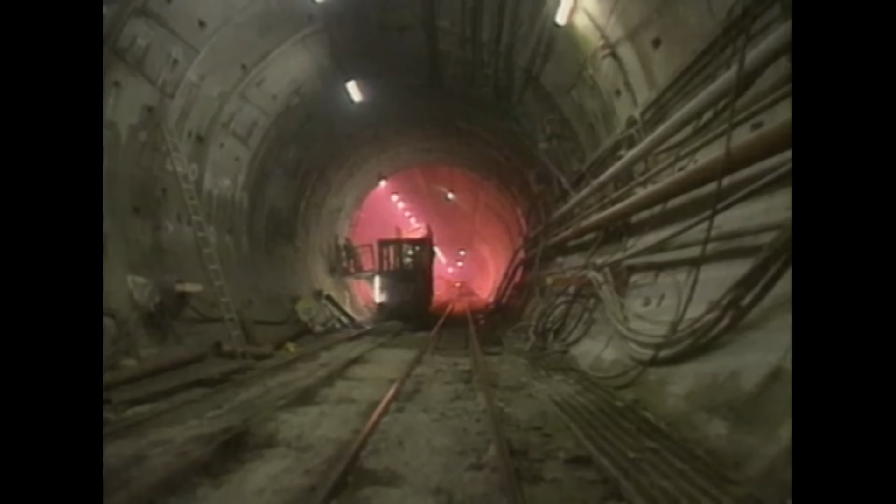Deep beneath the English Channel, one of the most ambitious engineering projects ever attempted is about to begin. Using Earth-eating robotic monsters, 13,000 workers are about to embark upon an epic quest to build the longest undersea railway tunnel in the world. This historic journey will push the limits of technology and human determination to the breaking point. Some workers will not survive. But the creation of the Eurotunnel is a story of triumph, one of this century's greatest superstructures.

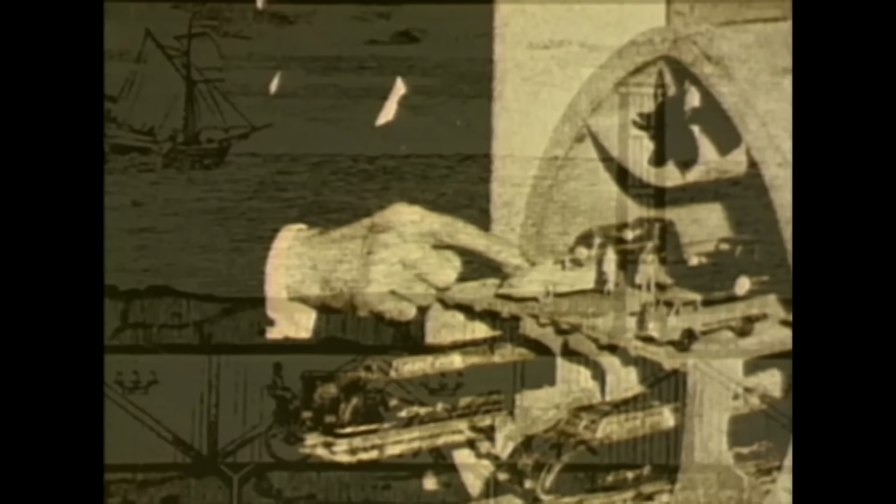Ever since the Ice Age ripped them apart 10,000 years ago, a small finger of ocean, the English Channel, has been the only path between England and Europe. Throughout history, countless lives have been lost trying to cross this treacherous body of water. For centuries, amateur designers and skilled engineers alike have tried and failed to create a safe, permanent link. The first channel tunnel design, if you can call it a design, was in 1802. But at that time, the technology was so limited that really it was science fiction.

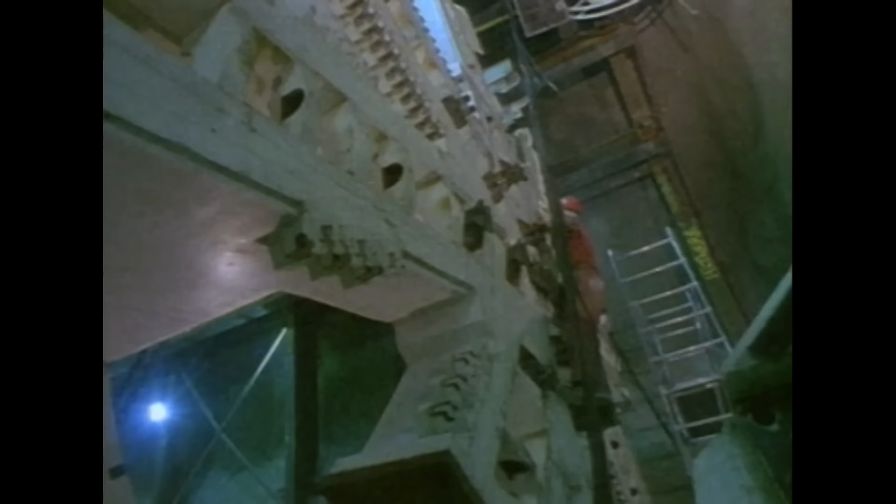But by the end of the 20th century, the line separating technology and science fiction is rapidly disappearing. It is now possible to create machines the size of large buildings, machines that can literally move mountains. Inside factories like these, engineers begin experimenting with space-age technologies to take humans into new and potentially dangerous territories. Soon, an age-old question is asked once more. Can a tunnel be created under the English Channel?

But does England herself even want such a passageway? From the days of Camelot to the age of Churchill, the Channel's cold, choppy waters formed an imposing barrier between the monarchy and its enemies. Would-be conquerors from Napoleon to Hitler developed plans of how they could first defeat the English Channel and then England itself. Ironically, during World War II, Adolf Hitler developed a plan to dig a tunnel near the captured French town of Calais, site of the modern-day French Eurotunnel station.

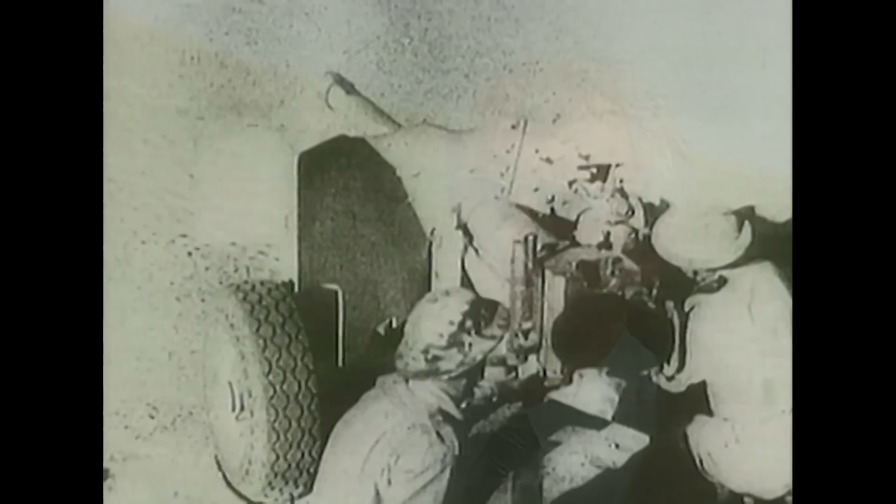It was a threat the Allied forces took seriously. Bomber pilots were requested to report any plumes of grey material in the channel, and they actually established soldiers along the coast here with listening devices trying to detect any sounds of tunnelling. But with the defeat of Germany in World War II, Europe entered a new era. The sounds of war were replaced by the sounds of commerce.

By 1986, one-time rivals England and France decide the Channel has become an economic barrier, an obstacle that must be eliminated. To achieve this, the French and British governments dedicate themselves to the task of building a modern marvel, the world's most technologically advanced undersea tunnel. Engineers and business people alike dream of high-speed rail trains traveling beneath the English Channel, carrying the citizens of a united Europe into newfound economic opportunity.

But before the first shovel of dirt is even dug, the project seems destined for failure. This was a nightmare at the time. We had to decide on things which we didn't really know about. And one example, which I always quote, is, what diameter do you want for the tunnel? Now, you would think that this was something that had been decided before, but it hadn't. And the contractors kept pestering us, saying, what size tunnel do you want? And we said, well, listen, we just arrived. I don't know.

For as long as we can all remember, people have dreamed of a channel tunnel. As this ad, seeking Eurotunnel investors, points out, the project was financed solely by private investment, with an original price tag of over $10 billion. This made it very different from other large engineering projects of this century, like New York City's Lincoln Tunnel, which was government-funded. Ultimately, Eurotunnel had to answer to its shareholders.

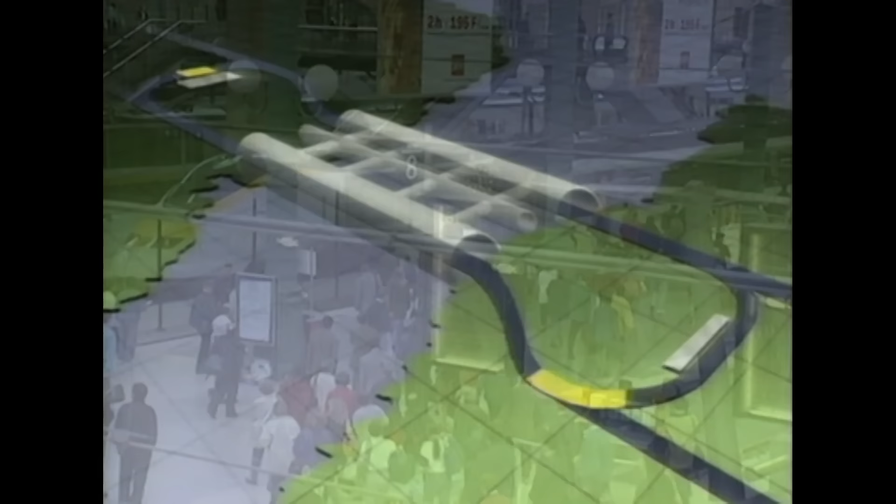Engineers envision a system that will carry thousands of passengers and hundreds of tons of freight each day on this circular 30-minute trip. Of the 35 miles between the French terminal at Calais and the British terminal at Folkestone, 24 will be undersea. No other project has ever attempted to tunnel this far in such a hostile environment. There are lots of problems, technical problems. How will a car move inside the tunnel? What kind of trucks can I transport? You know, all the variety of things.

As the project begins in late 1986, all of these questions remain. But before issues regarding the tunnel's operation can be addressed, the most daunting and obvious problem must first be solved. A machine that can chew through more than 30 miles of solid rock, hundreds of feet below the sea, doesn't exist. It will have to be created.

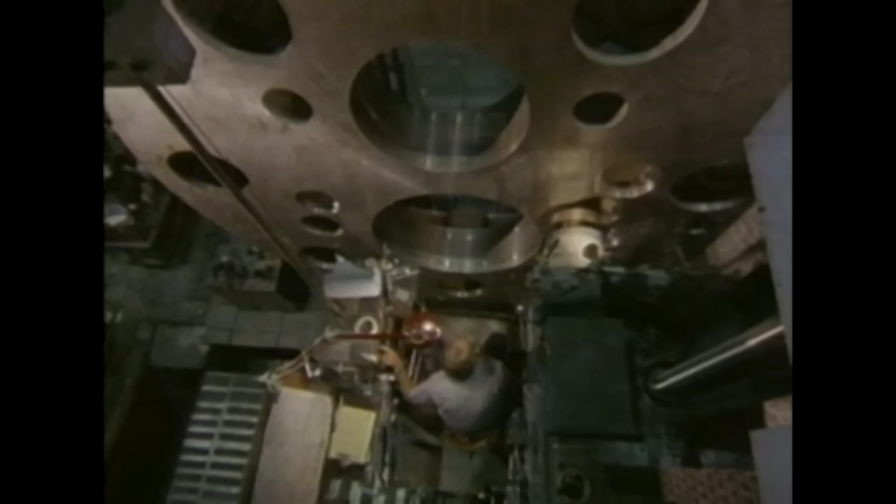Thousands of miles from the English Channel, on the outskirts of Seattle, Washington, a solution is being forged of iron and steel. Here at the Robbins Company, a firm specializing in heavy mining and tunneling equipment, the next breed of super machines is being created. In this colossal factory is a mechanical beast that dwarfs its creators. It's called a tunnel boring machine, or TBM.

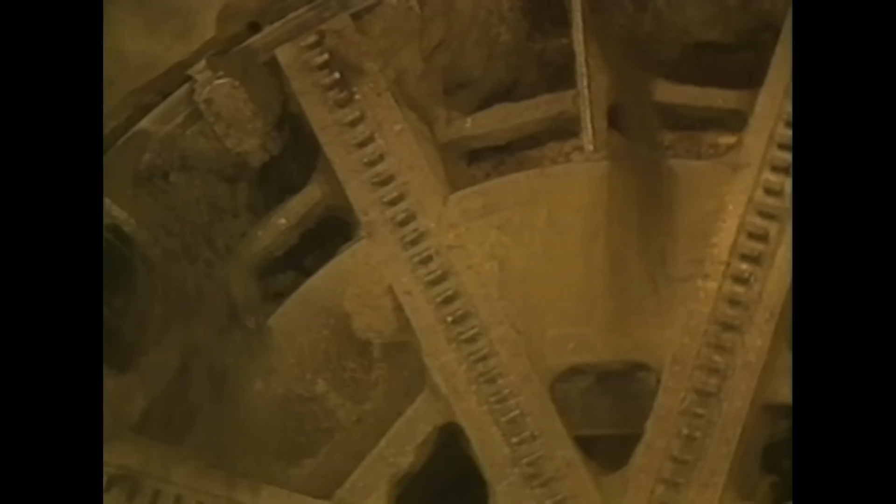When finished, this giant snake-like earth mover will be over 800 feet long and weigh over 1,500 tons. Its rotating head, almost 30 feet in diameter, consists of hundreds of cutting edges made from tungsten carbide, one of the hardest materials known to man. These will be the teeth of this mechanical monster, the cutting force it will use to chew through the earth below the channel.

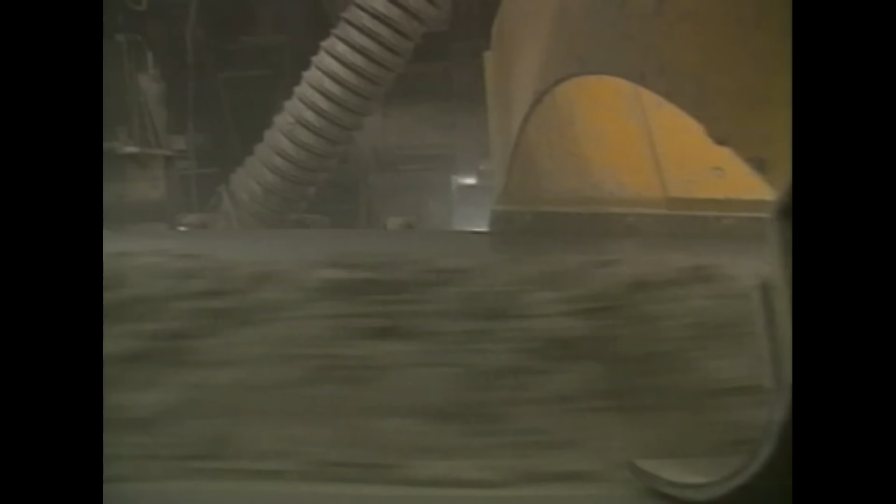Pushing the machine forward is a series of powerful hydraulic devices called rams, which will drive the cutting head through the rock. The millions of tons of excess rock it will dig up, called spoil, will be carried out on conveyor belts through the TBM service train attached to the cutting head. The challenge of carving tunnels through solid rock has always pushed the boundaries of our engineering and manufacturing skill. Even today, it requires a rare balance of brain and brawn.

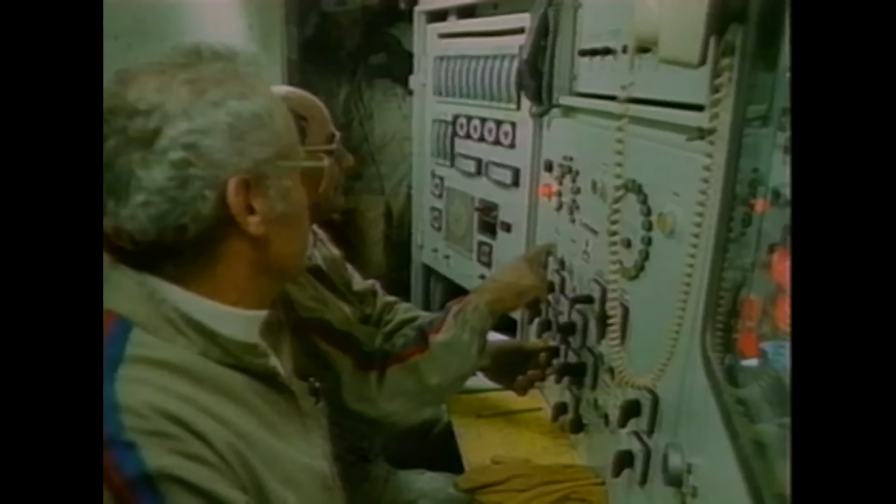When large-scale projects like the Los Angeles Aqueduct System were being created in the 1930s, tunneling technology was in its infancy. Today, the Robbins Company will replace blasts of dynamite with a computerized mechanical marvel of which the early pioneers could only dream. But the danger these modern miners face will also be unparalleled.

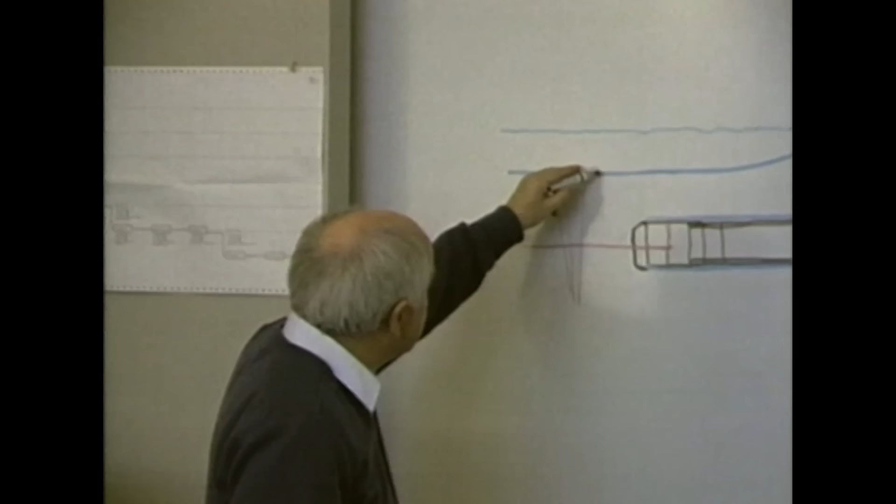At its deepest point, the tunnel will be 246 feet below the seabed. During construction, if their boring efforts create a crack in the tunnel or cause a leak, the force of the incoming water will be equivalent to over 7,000 tons of falling weight. Man and machine would be crushed in an instant. At the Robbins Company, frightening scenarios like these must be addressed.

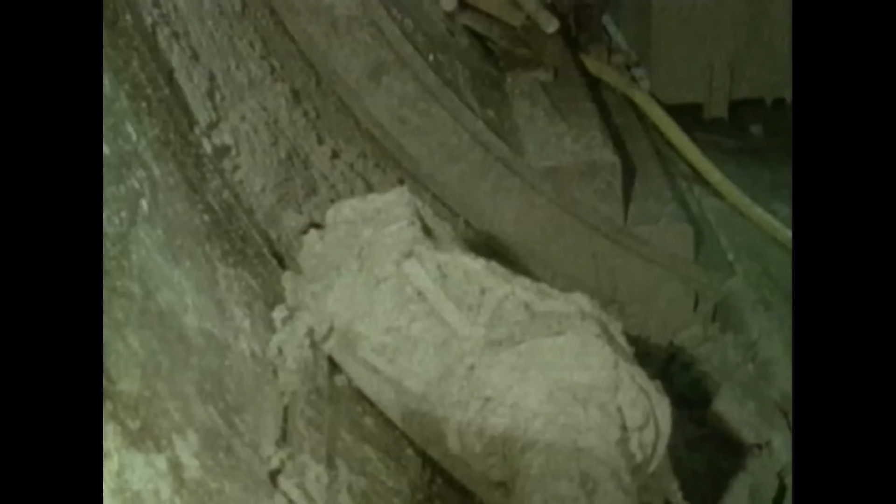Project organizers selected the tunnel's route precisely because it goes through a layer of chalk called marl, which is well suited to their tunneling efforts. It is also the last remnants of the original land bridge that once connected England and France over 10,000 years ago. While this chalk is ideal for tunneling on the British side, the situation on the French side of the channel is far more treacherous. Here, the seabed is riddled with faults and fissures. Conditions that could lead to the deadly accidents engineers must try to prevent.

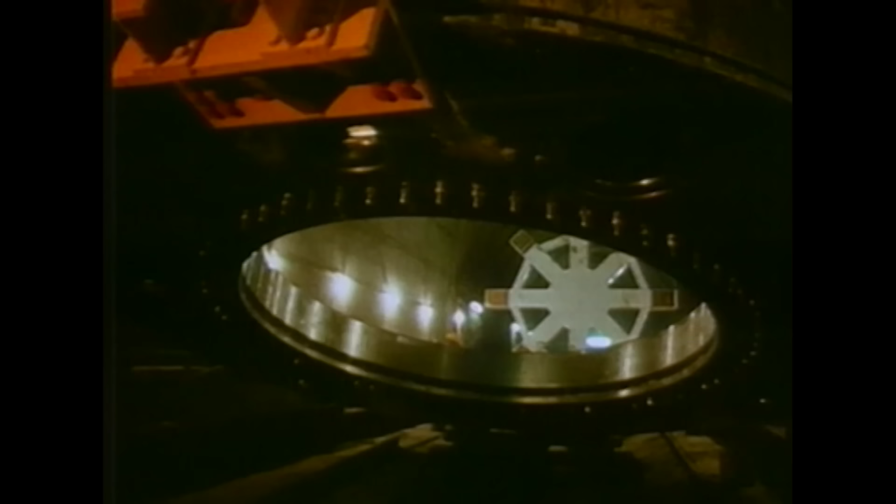Of the 11 TBMs that will be created for this mission, the machine that will be used on the French side faces the most difficult job. Working at greater depths, in parts of the seabed that are far less stable than the British side, this undersea giant will have to withstand pressures twice as intense as any tunneling machine has ever experienced. So engineers decide to create a special TBM that is part boring machine, part submarine. When finished, it will be able to withstand the same amount of undersea pressure as a World War II sub.

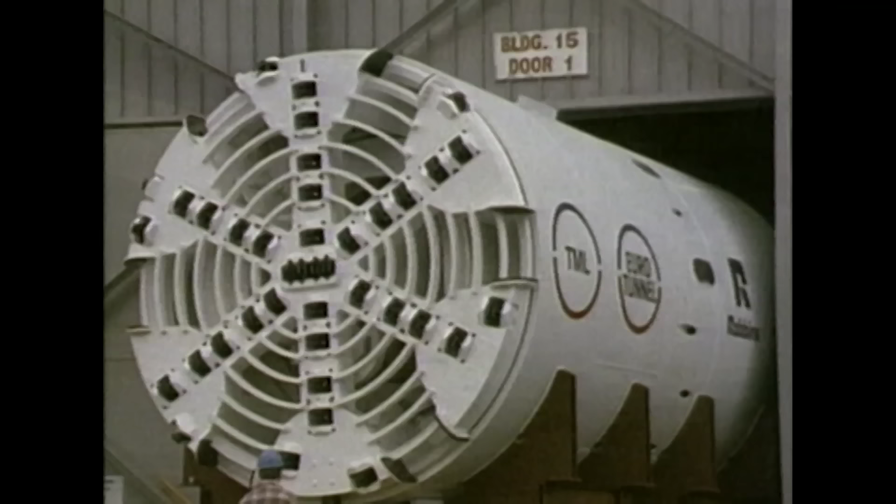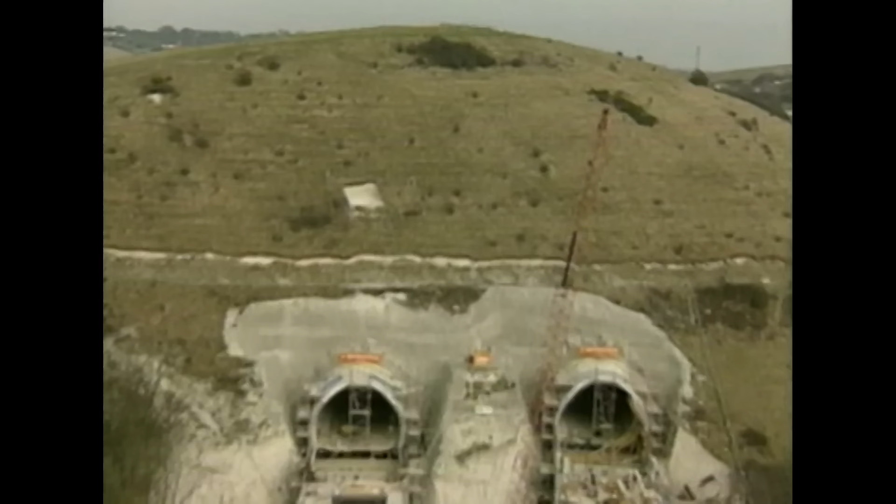Finally, the technology behind the dream of reuniting the European continent seems to be in place. And while the project will ultimately link England and France, the massive construction process will be an international effort. Companies from Germany to Japan will add their technologies to the mix, making the Eurotunnel a truly global undertaking. While this international force rallies to overcome the physical obstacles of the channel, there are other challenges already mounting. Namely, the race to complete the tunnel on time and on budget.

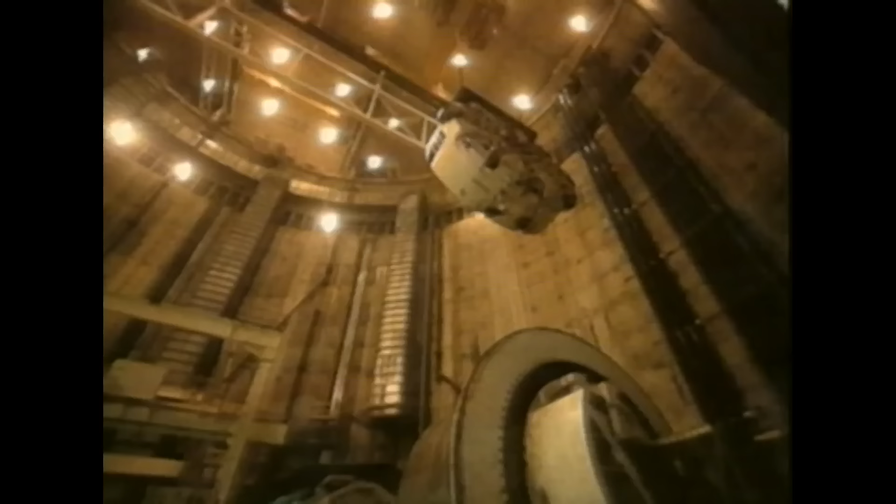It is now December 1987. This is where the Eurotunnel begins: 2 huge shafts at Sangatte, France, and Shakespeare Cliff in England. Too enormous to be delivered to the site as complete machines, the first TBMs are lowered piece by piece into the darkness of the shafts 200 feet below. Going with them are the workers, the men behind the machines. They too are descending into the unknown, taking the first steps of an epic journey.

As the first work begins and the light of day slowly disappears, there is an air of hope, expectation, and much uncertainty. While extraordinary safety measures have been taken to protect the workers, it remains a dangerous world. And for some, the greatest civil engineering project of the 20th century will carry the ultimate price tag.

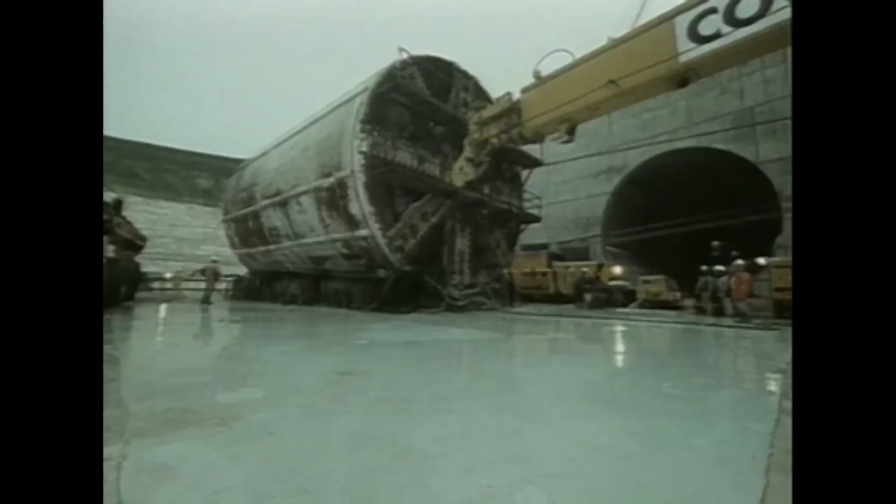As giant mechanical earth eaters are given a final check before being lowered to their work site hundreds of feet below the ground, one of this century's most ambitious engineering projects is underway. The creation of an undersea railway that will link England and France begins here in Sangatte, France, and here at Britain's Shakespeare Cliff, near the site of the future Folkestone Terminal.

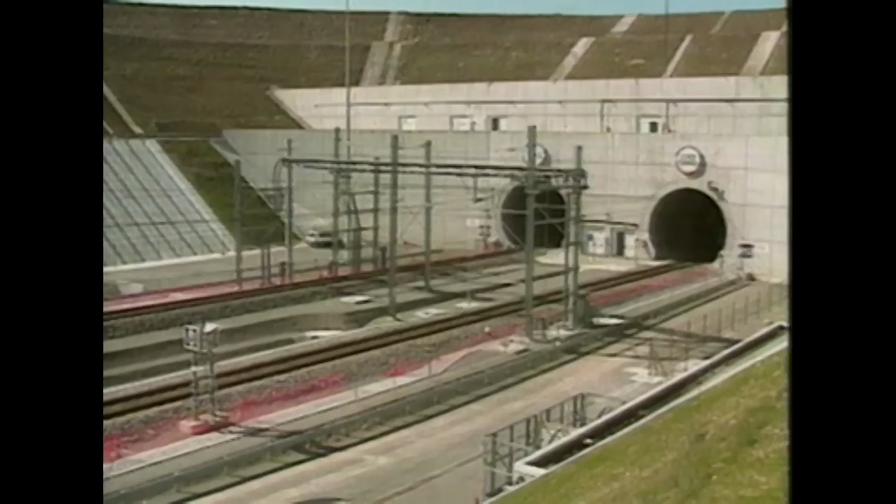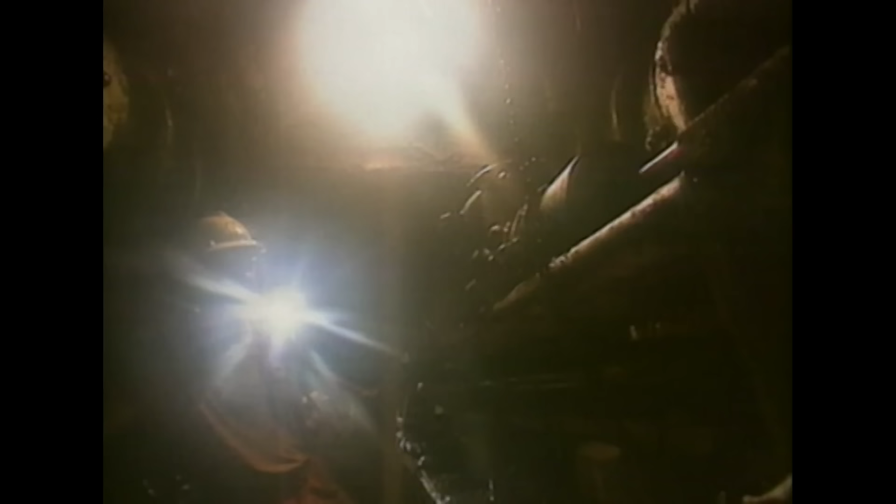What officials hope will someday be the world's premier railway system is now just a hole beneath the earth. The race is on. Compounding the awesome challenge of the actual tunneling operation is a human challenge. British and French workers, once bitter rivals, must now learn to work together. Once they reach the dark and dangerous caverns deep below the earth, there can be no room for cultural misunderstandings.

A French engineer is trained to make a plan. They can't start work unless they can see what there is to be done, see where their task fits into the whole thing, and see how it's all going to be organized as it goes along. No such thing in the British culture. British culture is to sit down and say, now what have we got to do, chaps? And sort out who's going to do what and set to work.

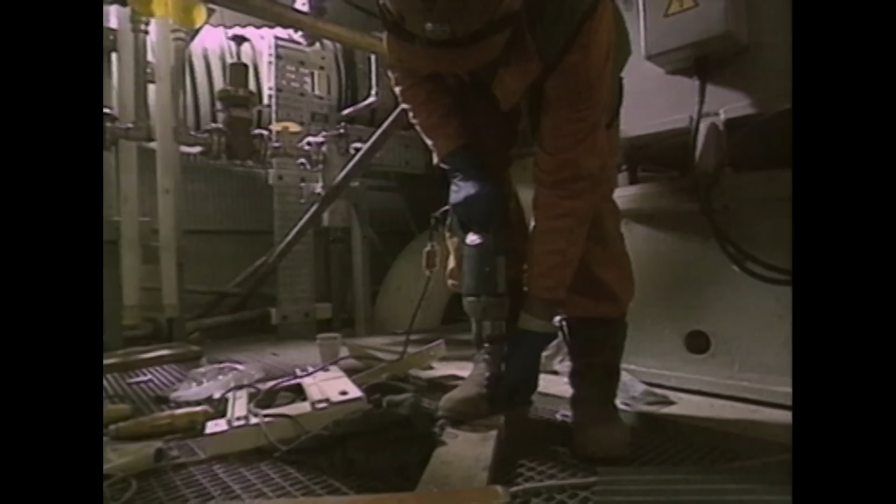One of the first problems they face is the assembly of the giant tunnel boring machines, which the workers christen the moles. Even the smallest machine takes months to build and costs several millions of dollars. The largest of these subterranean titans weighs 1,500 tons. Because of their enormous size and weight, the TBMs must be assembled on site, which in this case is far below the earth.

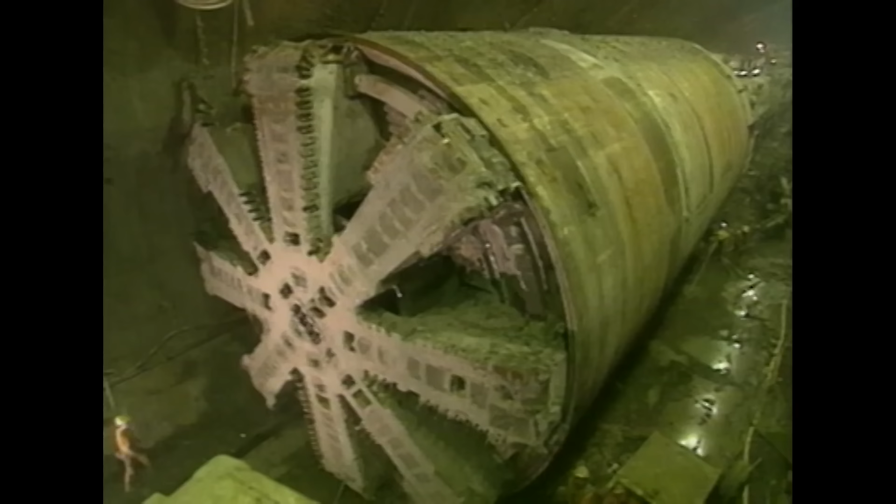The actual cutting head of the TBM is just the tip of its immense body. Attached to it is the service train, a multi-car train system that carries the hydraulic power to drive the TBMs forward. When connected to the cutting head, each service train is a staggering 850 feet long. One of the service train's main functions is to be a conduit for the removal of millions of tons of rock and sediment these mechanical moles will dig up.

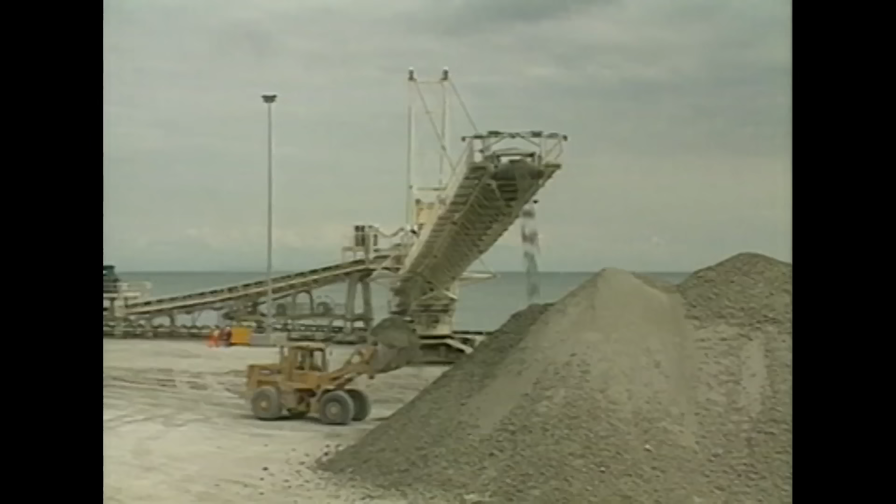The debris will be carried by conveyor belt through the service train to a supply train and back, and finally to disposal facilities in England and France. The removal of the spoil is a major challenge. When operating at full speed, engineers estimate the TBMs will cut through 750 feet of rock per day, removing 2,400 tons of waste per hour. When the project is finished, the total amount of rock removed would fill a major football stadium 13 times.

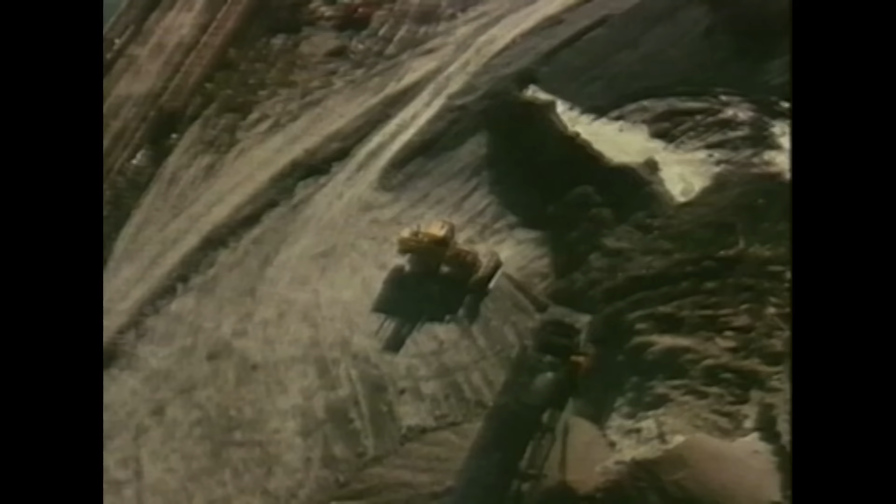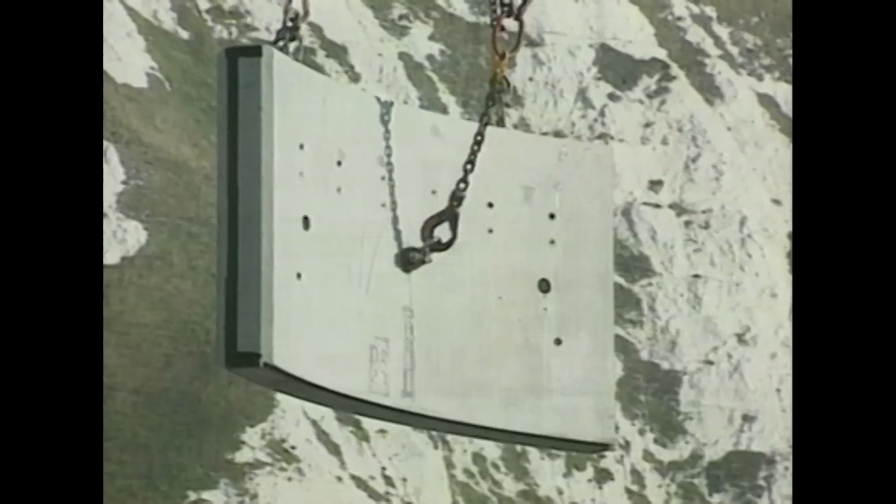But equally important as taking material out of the tunnel is the challenge of getting materials in. And one of the most crucial building blocks at this underground work site are the 500,000 concrete slabs which will line the tunnel walls. Because these concrete rings will provide a life-saving barrier between passengers and the churning English Channel above them, their construction is of utmost importance. Special factories are built in England and France to manufacture these vital sections.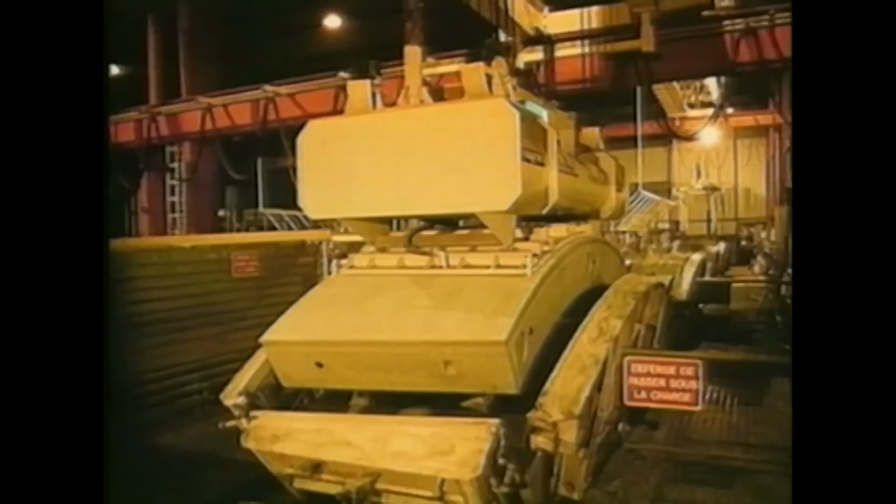Each ring is made of specially reinforced concrete, even stronger than the concrete used in nuclear power plants. It is also reinforced with a framework of steel rods for extra resistance. This is necessary because the savage ocean pressure that will bear down on the tunnel walls is equivalent to 12 atmospheres, or 12 times the pressure we feel on the surface. No human could survive under such immense force.

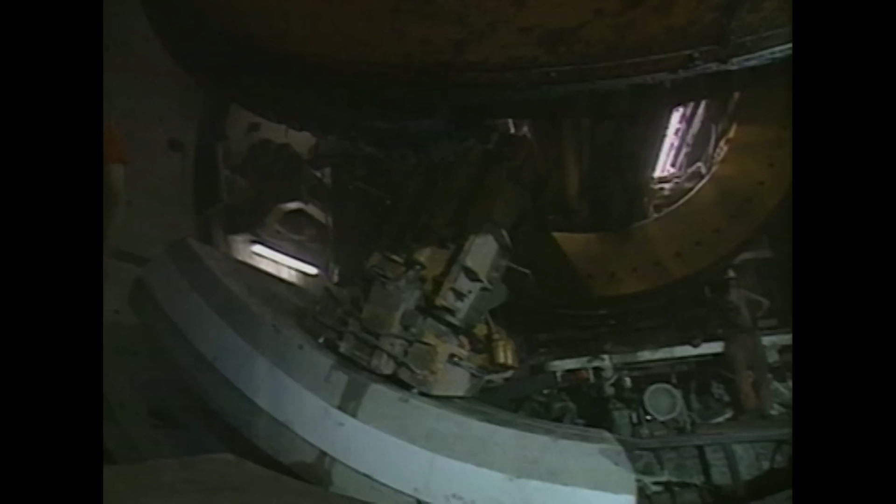Once the rings are finished, they are transported by narrow gauge railway to the TBMs in the tunnel and brought up through the service train. Then, a remarkable display of mechanical symphony takes place. As the spinning head of the machine claws its way through the rock, operators using giant cranes create the tunnel walls right behind them. After being fitted into place with incredible precision, a gap of only 3/4 of an inch remains between each section. This tiny space is then sealed with a cement grout, and another piece of the tunnel wall is complete. When finished, each ring of the tunnel will weigh 40 tons.

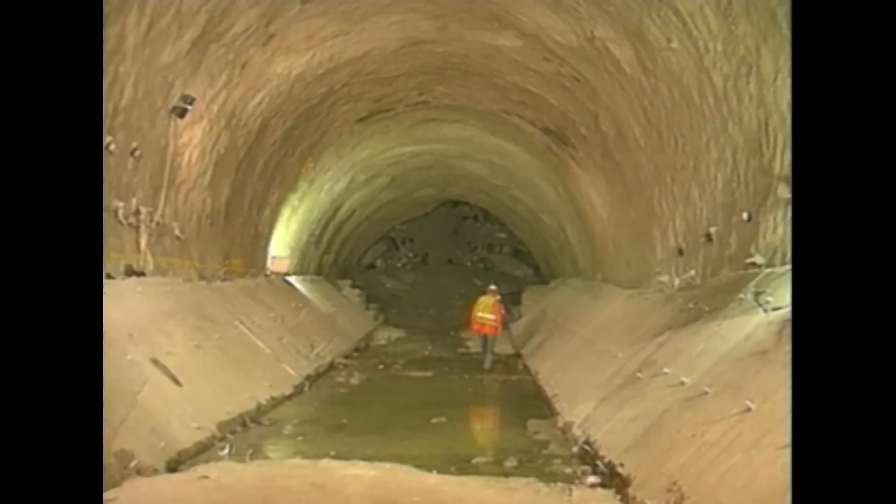But just as the skeleton of the tunnel is beginning to take shape, the project suddenly seems in danger of falling apart. It is now 1988. The British and French teams are starting with the middle service tunnel, drilling towards each other to meet in the middle of the channel. But by May, the giant tunneling machines begin to break down.

It was designed to operate at pressures that no machine had ever operated before. It was strictly a prototype as a result of the fact that it was so complex and nothing like it had ever been built. It had all kinds of troubles. Practically everything important on the machine failed or broke at one time or another shortly after we installed the machine.

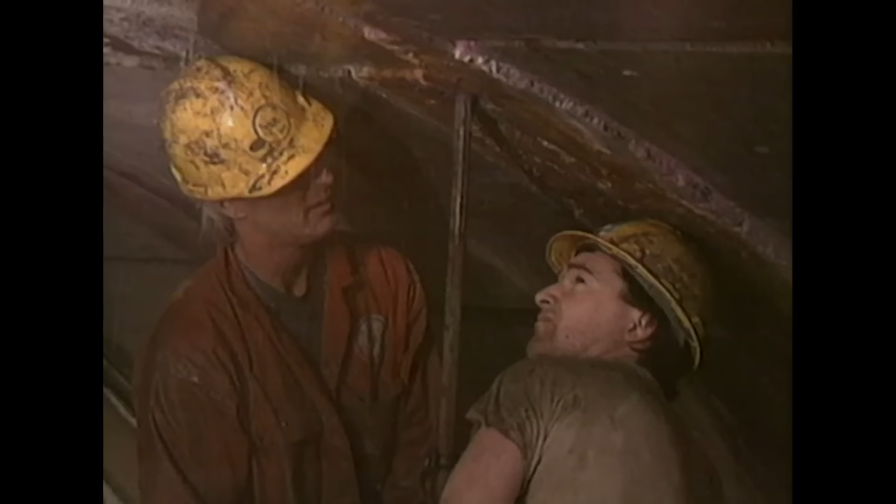On the French side, the TBMs are encountering precisely the scenario engineers feared the most: hidden faults and fissures in the seabed. On the other side of these cracks lie the awesome forces of the English Channel. It was technically very difficult because of the water pressure that we had to work in. As the machine bored forward, it bored right through faults that were filled with seawater, connected directly to the ocean.

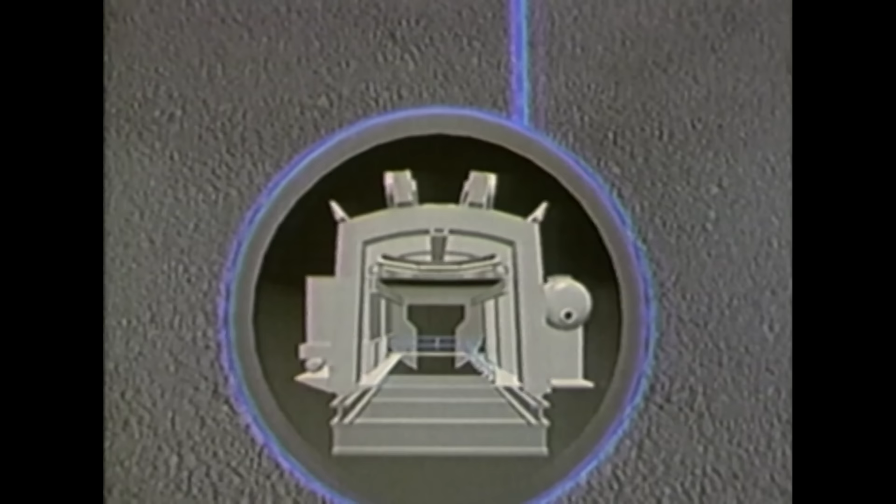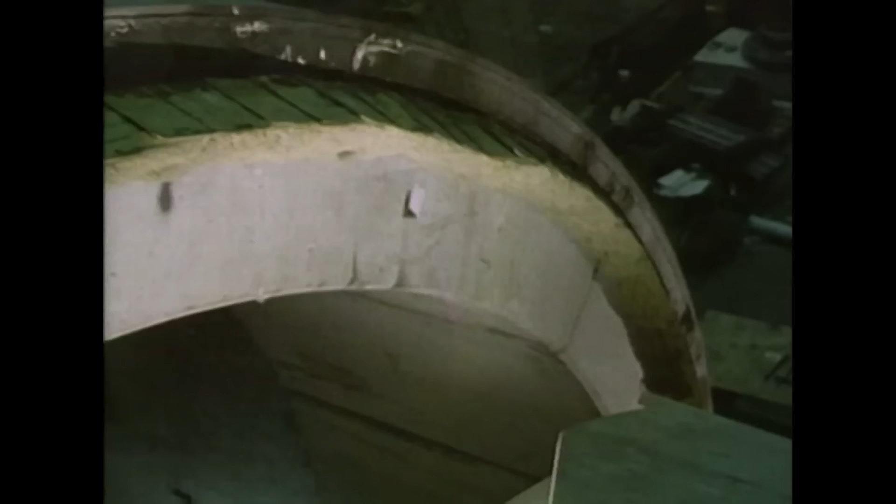Waterproofing measures designed to protect the TBM's delicate electronic equipment from the seawater fail, stopping the giant machine in its tracks. Then, as engineers scramble to repair the electrical problem, another even larger problem develops. This is the seal we intend to use. It's a wire brush type seal. The ring of watertight seals providing a life-saving barrier between the TBM and the tunnel walls also begin to fail. Again, victims of saltwater corrosion.

Engineers need a solution, and fast. The corroded brush-like lining seals are replaced. Then, a mixture of paper and special grease is applied to the brushes. When this coating comes in contact with seawater, the paper particles expand and create a permanent, watertight bond between the segments. The TBM is once again waterproof.

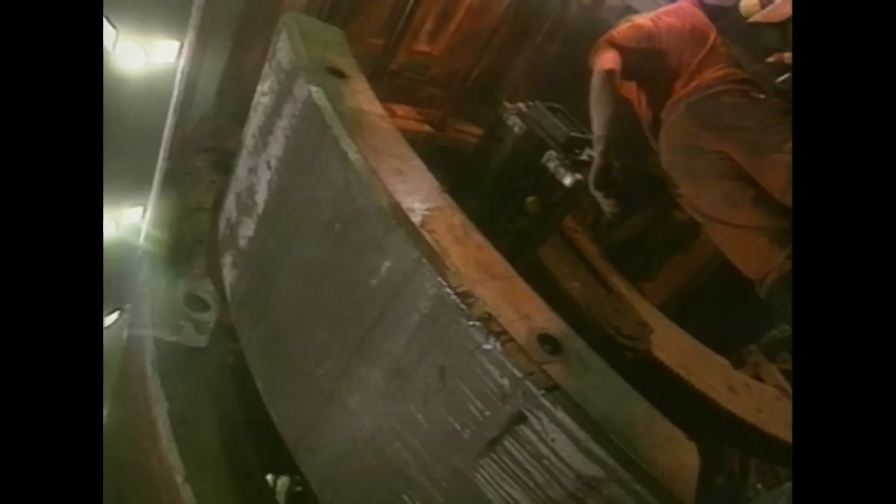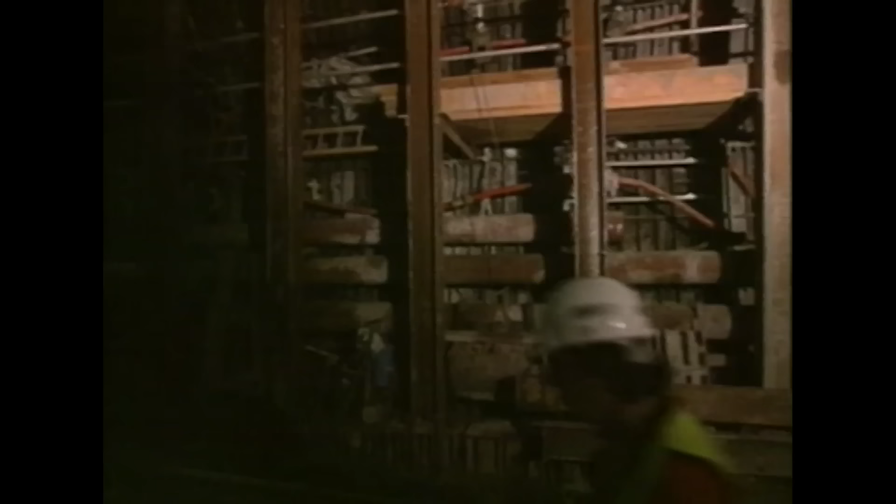But to Robbins Company President Richard Robbins, the tunnel wall seemed far more secure than the legal agreement he is working under. Soon he is forced into a desperate personal gamble. The French contractor knew that we had designed a prototype machine that we didn't really understand exactly what it was going to cost us to build. So he built into the job some interesting incentives that if we met certain project construction points along the tunnel by certain dates, we would earn bonuses.

But it was so bad in the early stages that I was really almost betting the entire company that we would succeed. So it was a big risk for a small company like ours. But it isn't just contractors like the Robbins Company who are gambling their future. Because the entire project is privately funded, Eurotunnel officials must hit their own deadlines to continue to receive funding. With each new delay, the entire fate of the Eurotunnel lies in the balance.

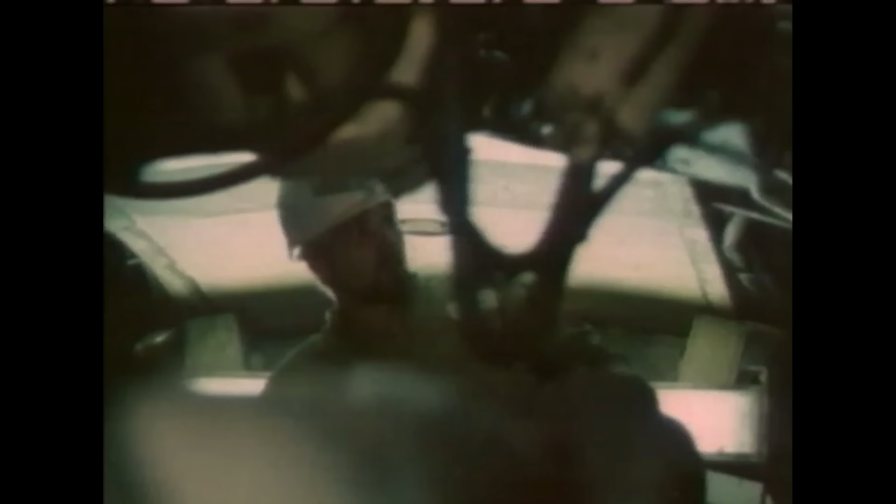The one thing we all understood was that if we stopped, it would be very hard to restart. The relationship with the banks, the problems with the contractors, the difficulties with the governments, or just plain organizational difficulties of whatever kind, would very probably bring an end to the project. Finally, engineers are able to redesign the mechanical flaws in the French TBM and move ahead. But they are now 9 months behind schedule. To make up the time, both the British team and the French team must stay on course.

But how will these mole-like machines, tunneling towards each other from opposite directions, maintain such a specific course? They are far too deep below the Earth for high-tech satellite mapping to be of any use. And even the slightest deviation in their course, a fraction of 1 degree, will mean they fail to meet up under the channel. To remain on track, tunnel engineers use a space-age laser beam guidance system.

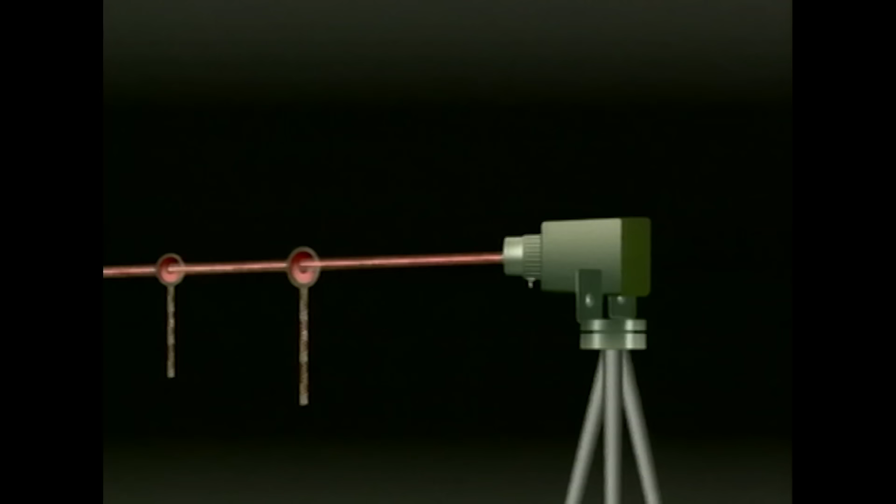Here, a red laser emits a beam from behind the cutting head. As it sends a beam of light forward, it hits various control points fixed to the tunnel wall before striking a special target on the rear of the cutting head. These control points feed information provided from the laser straight into the machine's onboard computer. From the TBM control cabin, operators can now adjust the hydraulic rams that thrust the TBM forward and keep it precisely on the right course.

But even if the two machines do stay on course, the complex plan for after they meet has never been tried before. As the French and British TBMs tunnel towards each other, they will reach a designated point where they will stop.

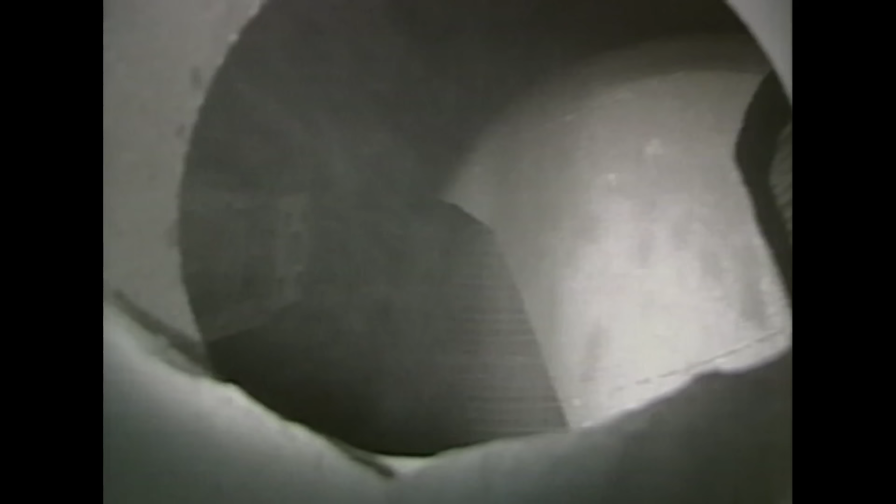They will now be a mere 100 yards apart. At that point, a long steel probe will be sent through to determine if they have been truly on course. If so, more conventional equipment will finish the relatively short distance that remains. But if the two machines are off course, it will mean yet another delay while engineers try and come up with a solution. And with the project's skyrocketing budget under fire, more delays could signal the end of the dream called Eurotunnel.

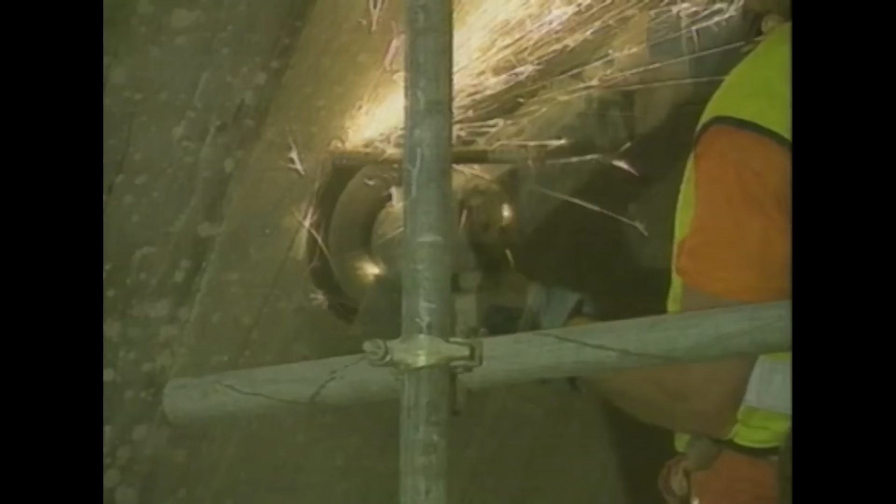1989. The year begins on a positive note at the Eurotunnel construction sites. The earlier problems with the French tunnel boring machines seem to be solved. One of the giant TBMs even sets a world tunneling record. For almost 3 years, work on the tunnel has progressed without a fatality. But in the first days of a new year, a time usually associated with hope and new beginnings, tragedy lies just around the corner.

On January 20th, in the dark recesses of this massive cavern, the tunnel claims its first victim. 19-year-old engineer's assistant Andrew McKenna is walking half a mile down the tunnel beside the narrow-gauge railway tracks used by the supply carts. Apparently failing to hear an oncoming train, he is suddenly crushed to death by a locomotive carrying spoil from the site.

Without warning, the stark reality of their dangerous jobs becomes clear to every worker. The tunnel has claimed one of their own. Even with 20th century technology, the job of building tunnels remains extremely hazardous. While workers cope with the loss, they also have to deal with other day-to-day fears brought on by the tunnel.

At the pumping stations, they actually went underneath the tunnels, and there would be like a little tunnel under the main tunnels, so the trains would be going above you, and you could be down working in 3 foot of water in a little cross passage with a blank wall with nowhere else to go, and that could be very claustrophobic. And we actually experienced people being sent in to work with us who were, and found out they're claustrophobic.

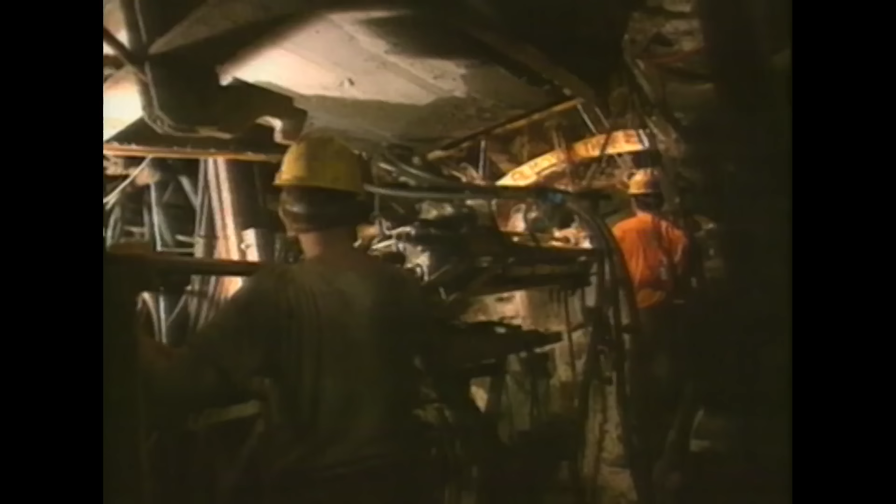And then it became a little bit scary because you had to say to them, look, you can't work with us down there, you're terrified of the situation, and you had to think of everybody else's safety. It was dark, it could be dusty, so you had to be able to cope and have a sort of positive outlook, really.

Even with the most rigid of safety standards, the death of Andrew McKenna will not be the last tunnel casualty. In all, 12 people will die in this historic and sometimes tragic undertaking. And while the mood of the workers has turned suddenly dark, the tunnel itself remains unchanged. Here, it is always dark. Workers who refer to their machines as moles are left wondering if they are the real underground creatures.

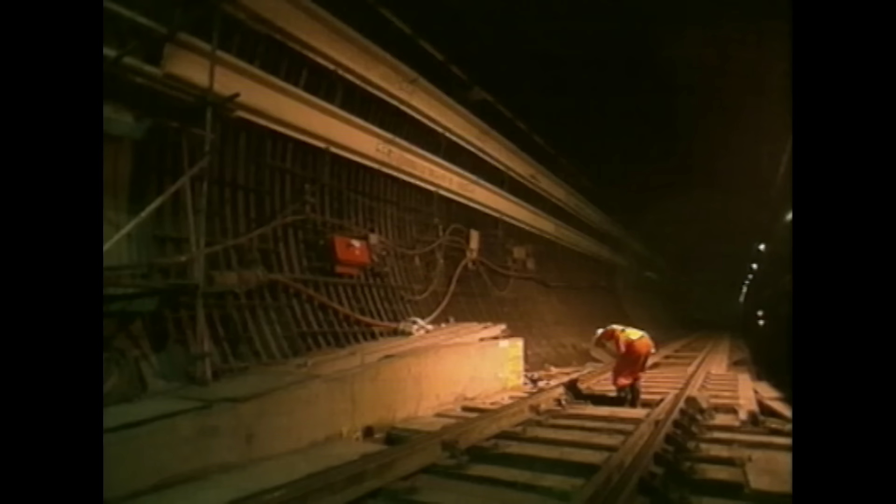You could be on a day shift where you arrived at work 5 o'clock in the morning and it was pitch black. You could go into a tunnel, work all day in darkness or semi-light, not bright, and then you come out at 5 o'clock at the end of your day and it was dark again. So you could go a whole week without seeing daylight. And that was a very weird experience because it's daytime and yet you never saw it.

As workers move forward in the darkness below ground, above them, work continues on the high-tech trains that will use the system when it's finished. The new service being created exclusively for the Eurotunnel is called Le Shuttle. Tunnel officials say the name is an example of the Anglo-French cooperation that characterizes the project. When finished, Le Shuttle trains will carry passengers in their cars on a continuous loop between the Folkestone terminal in England and the Calais terminal in France.

In plants like these, workers use more than 10,000 welds to mold more than 5,000 parts into the single shell of a train car. Each Le Shuttle train is being specially built for the frequent trips and heavy loads it will haul. To provide maximum power, a 132-ton locomotive is placed at each end of the train.

They have to be very special trains because the trains themselves are half a mile long and they have a lot of cars inside them or a lot of trucks, and therefore the locomotives have to be very powerful. They're the most powerful locomotives in the world.

Each of these locomotives must be capable of pulling a 2,400-ton train by itself. For this kind of power, they will draw upon 25,000-volt electrical cables. This high-voltage energy source provides the equivalent force of a 7,600 horsepower engine, about 100 times the power of an average car.

While the shuttle trains have the most powerful locomotives on Earth, the sleek Eurostar trains have the world's fastest. The Eurostar passenger line uses the popular TGV trains, which will travel from Paris to London at speeds of 185 miles per hour. While in the tunnel, the trains will travel at more subdued speeds, approaching 100 miles per hour.

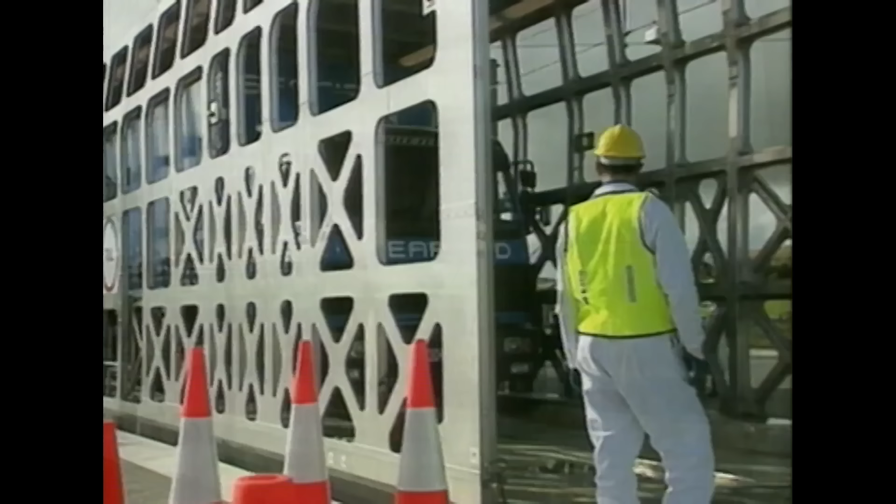Because the transporting of commercial freight will be so important to Eurotunnel's economic success, huge new rail cars are designed to transport heavy trucks. Each freight shuttle, also a service of Le Shuttle, will have 28 carrier wagons like these. Each carrier wagon can accommodate a truck weighing up to 44 tons. Below the earth, there is no finished railway for any train to travel upon. But that is about to change.

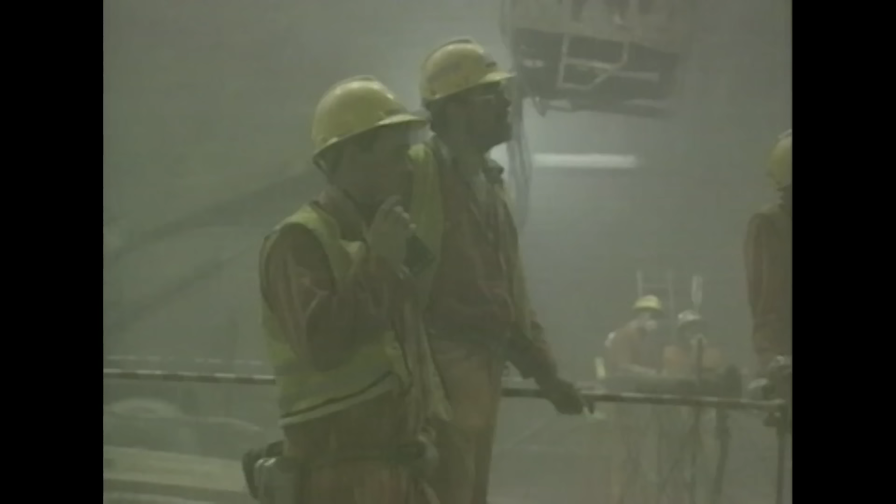It is now October 30th, 1990. There is a new feeling in the air today, a feeling of expectation. After 3 years of tunneling, the British and French TBMs digging the service tunnel, which will run between the two rail tunnels, have arrived at their undersea destination. Facing each other under the English Channel, 100 yards apart, the machines have stopped their digging. It is strangely quiet. The same question races through each worker's mind. Have they lined up?

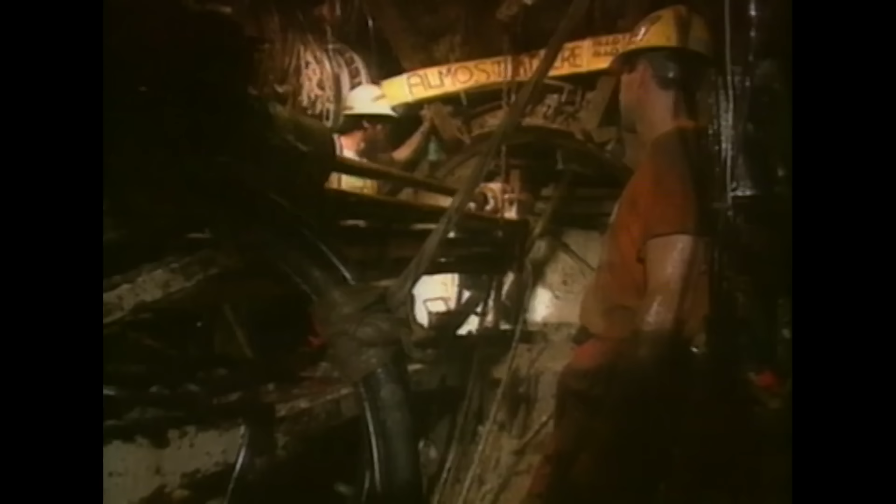A probe is sent through. There's a tense silence. Each worker at every level of the project knows it will be a catastrophe if the tunnels are off course. This would be the type of mistake that could fuel the flames of anti-tunnel sentiment into a raging fire. Finally, they get the news. The tunnels line up. England, by virtue of a 100-yard pole, is no longer an island.

After boring through 23 miles of solid rock, the tunnels are only off by 20 inches, well within the acceptable safety margin. It is a momentous achievement. While the project's workers, a unique collection of specialists from across the globe, revel in their victory, a celebration is quickly planned for the face-to-face breakthrough. Since there is still a 100-yard gap between England and France to close, it is decided that the official breakthrough of the service tunnel will take place on December 1st.

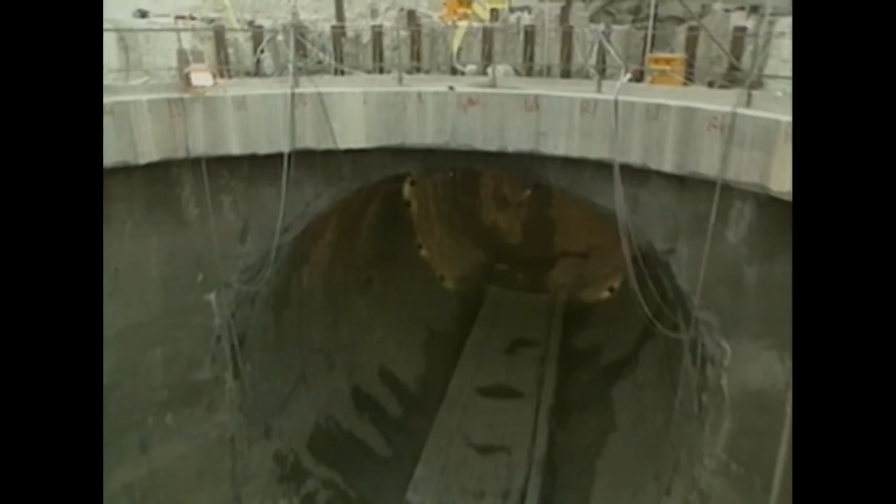As workers return to their jobs with a new sense of accomplishment, a lottery is held to pick one worker from each country to meet in the completed tunnel. Meanwhile, there is the problem of what to do about the last 100 yards. It is too expensive to retrieve both the French and the British machines, so a unique solution is developed. The British aim their machine downward and effectively commit mechanical suicide, burying the high-tech behemoth deep into the earth. This allows the French TBM to move forward and connect with the British side of the tunnel.

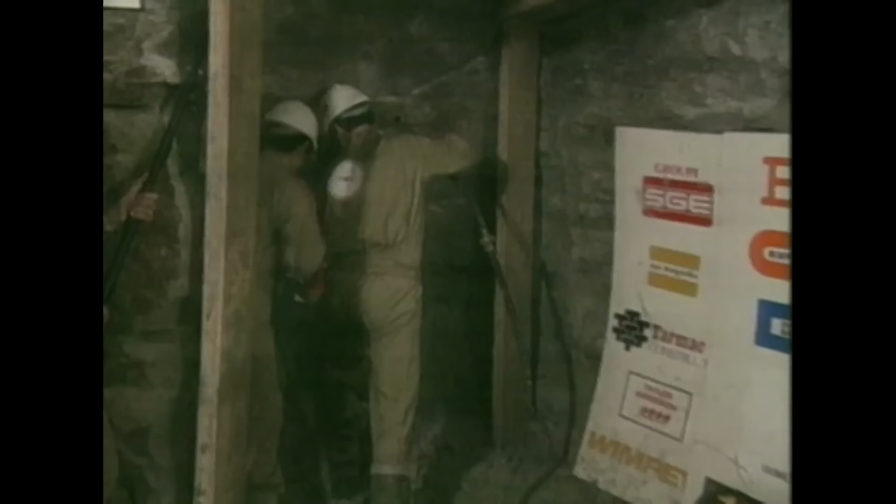December 1st, 1990. Finally, the moment of truth arrives. A thin layer of chalk, essentially a prop for this massive media event, is now all that separates Frenchman Philippe Cozette and Englishman Graham Fagg. With a couple of well-directed jackhammer blasts, a barrier that has stood for 10,000 years is gone.

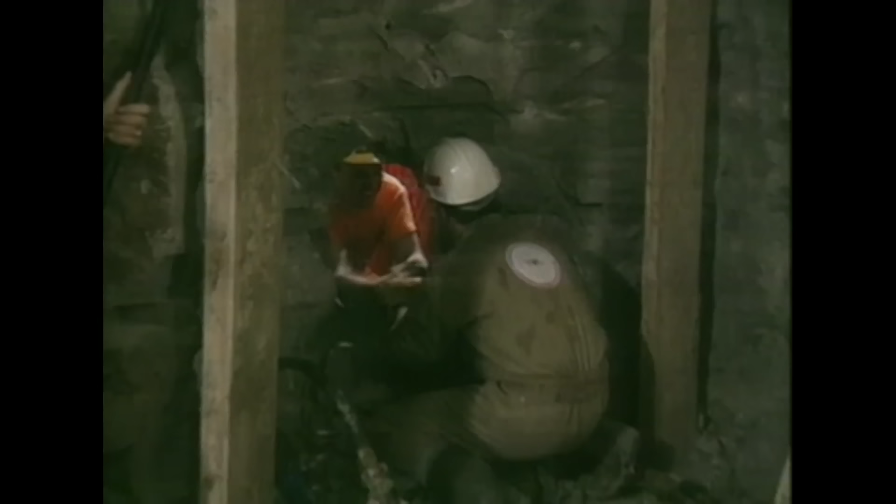They're through. Hey! There's the handshake we've all been waiting for, Mr. Fagg and Mr. Cozette. One of the most ambitious engineering efforts of the 20th century climaxes with a simple gesture of goodwill. Hundreds of feet below the English Channel, a Frenchman and an Englishman meet through a small hole. For the first time since glaciers ripped them apart thousands of years ago, France and England are once again linked.

The atmosphere was absolutely electric down there. Not only just at the breakthrough, but afterwards. And people were moving. We all felt European. I don't think anybody felt English or French. We were all European at the instant and for the brief hour before we could actually set off back to our respective sides. Amazing scene. Really wouldn't have missed it for anything.

The next few months will hold many more extraordinary moments. The public gets their chance to share in history with the above-ground breakthroughs. First in France, and then in England.

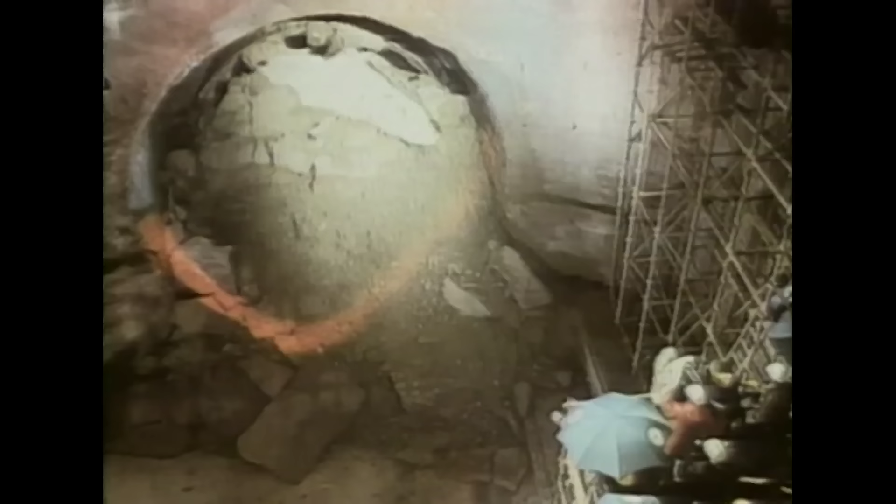When that tunnel broke through, there was a party that would end all parties. It practically went all night. It was at the Windsor Castle on the British side. Fireworks and feasting and about 1,000 guests, and it was really a marvelous party.

What I remember is sitting down there, having the feeling there is no more machinery running now, and a feeling in amongst the most tremendous uproar, popping champagne corks and backslapping and cheering and so on, a feeling of absolute silence. It was the most extraordinary feeling.

But amidst the revelry and the silence, the realization begins to sink in that there is still a long way to go. 2 more tunnels need to be created, not to mention the installation of the high-speed railway. Work on the Eurotunnel is far from over. As the parties celebrating the breakthrough of the service tunnel fade away, efforts to complete the 2 remaining tunnels resume at an energetic pace.

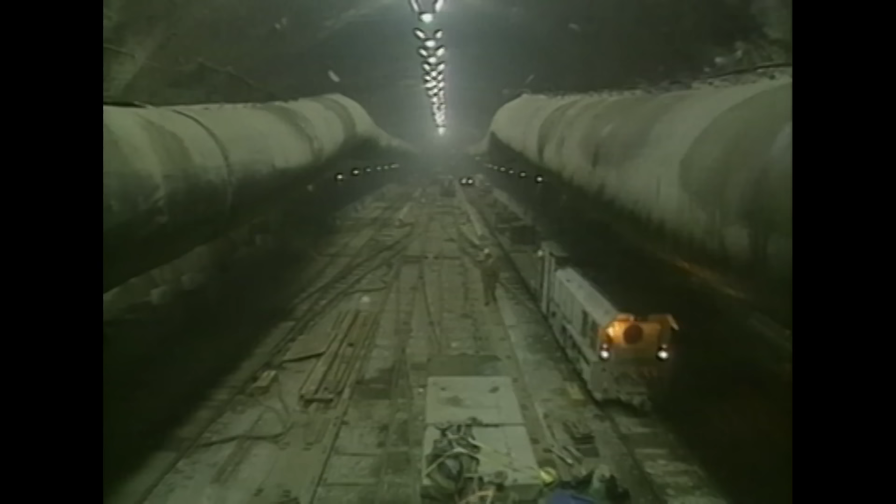The 2 main rail tunnels are called running tunnels. To allow trains to switch from one track to another, massive crossover caverns are carved from the seabed. 40 feet high and over 500 feet long, they are the largest undersea caverns ever created. Workers refer to these massive structures as cathedrals, but in the event of a deadly fire, they could quickly become a scene of mass terror.

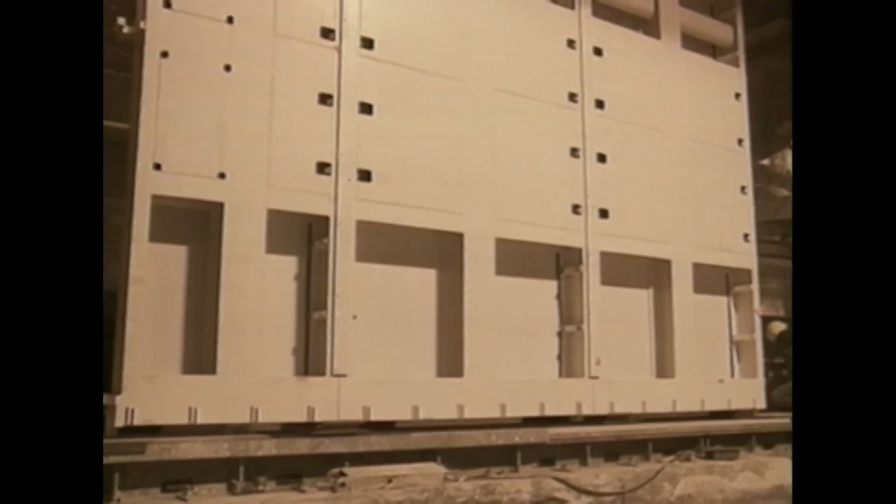To prevent fire from spreading from one running tunnel to the other, engineers build giant doors to separate the 2 tunnels. Each door is made from super strong carbon manganese steel. Then, a half-inch layer of flame-resistant material is added. These fireproof walls are a movable fortress, weighing over 100 tons each.

But fire isn't the only emergency tunnel officials must prepare for. Terrorist attacks, bomb threats, and even the remote possibility of an earthquake are all scenarios which must be planned for. The evacuation train will be with us in approximately 6 minutes' time. Specially trained security force and evacuation teams are established that constantly rehearse emergency procedures.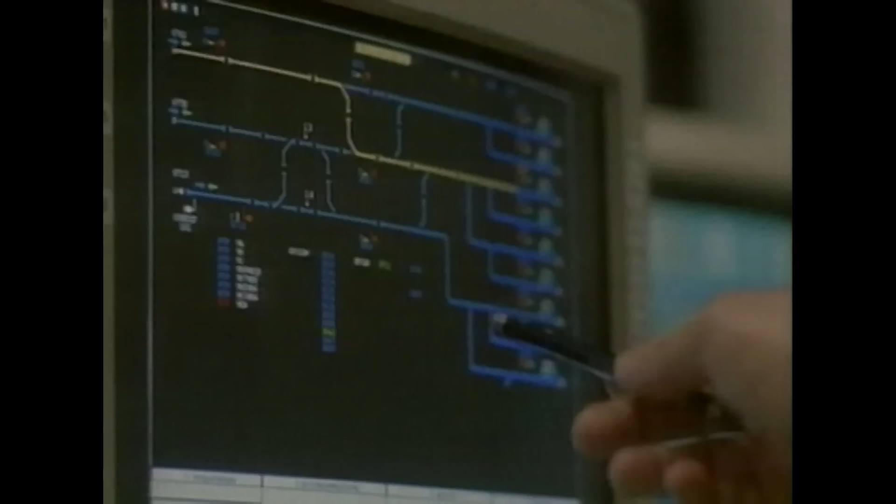While they speak the same language in times of emergency, French and British officials still have different beliefs regarding issues of safety. There are 2 different safety philosophies. The French have a belief in intelligent operators using sophisticated equipment, but in charge of the equipment. The British have a culture of fail-safe computers. Channel tunnel, you've got an aggregation of both, so you can be quite sure whichever you think is better, the tunnel's got it.

No other tunnel in the world is as safe as this one, with the central service tunnel, the fire supply systems, duplication of power supplies, emergency walkways, and all the procedures that have been put in place to cover every eventuality. But there is one eventuality engineers haven't planned for.

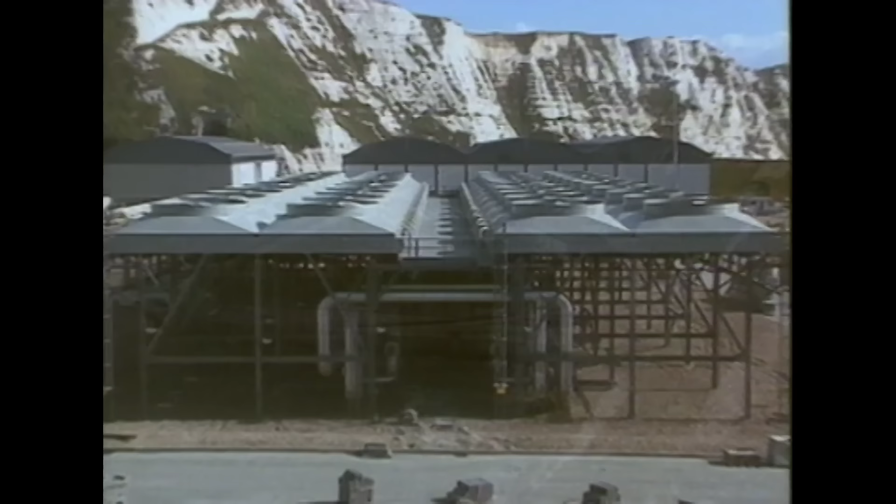As engineers perform test runs in the tunnels, the friction of the trains is producing an enormous amount of heat, raising temperatures to a scorching 140 degrees Fahrenheit. Scrambling for a solution, engineers create a pipeline filled with chilled, flowing water to keep the heat in the tunnel from accumulating. This cold water acts like a sponge to absorb the tunnel's heat. The water, now very warm, is then pumped to a cooling station on shore, re-chilled, and recirculated once again.

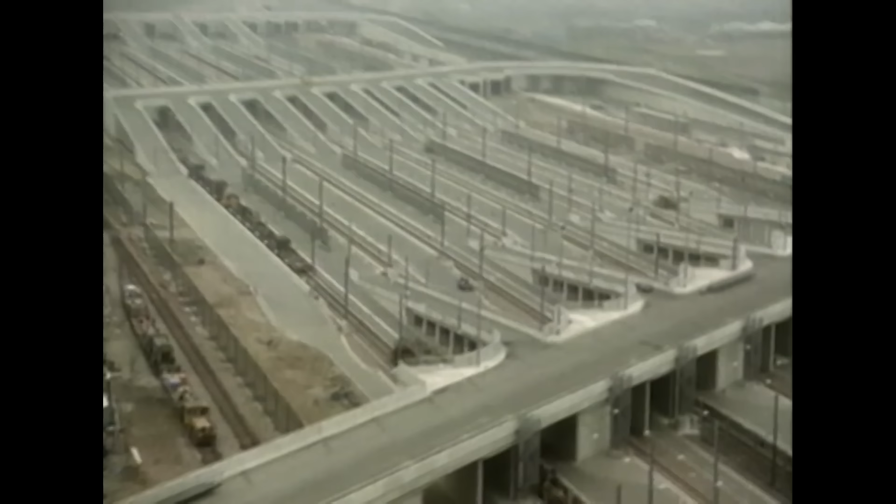Elsewhere, the 2 stations that will serve as Eurotunnel's passenger hubs are beginning to take shape. The massive French terminal at Calais is one of the largest construction projects in the world. Within its sprawling 11-mile perimeter, the Calais station will have 30 miles of roadway and 30 miles of railway track. While the British terminal at Folkestone is tiny in comparison, 5 times smaller than the French station, it will house the nerve center of the entire Eurotunnel system.

Press passage door 5650. You'll press the opening. Stand by, please. Here in the Folkestone Command Center, operators use state-of-the-art technology to control all of the rail traffic that moves through the tunnel. Sitting behind 3 rows of desks, they can survey a curved wall showing the status of the entire system. This high-tech display is called a mimic board. It shows the position of every train in the tunnel and at the terminals.

Door clear, opening now. In the event of a power failure, tunnel control will immediately switch over to the Calais Control Center, which is staffed at all times in case of emergency. Even the drivers of the shuttle trains will receive a little high-tech help. In this driving simulator, operators practice navigating through the tunnel.

In real life, the driver of each shuttle will sit in the front locomotive, while the captain of the train sits in the rear locomotive. The captain, who is ultimately responsible for the safety of the passengers, communicates with the driver by intercom. But the onboard computers also have command status.

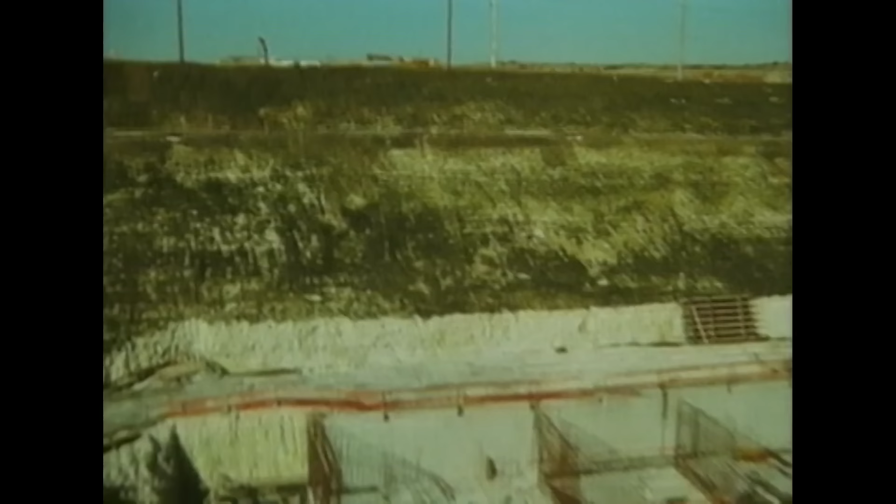By the middle of 1991, the project's infrastructure is beginning to take form. From the terminals to the trains themselves, it is beginning to look like the dream of an undersea rail link will be realized. But deep underground, two more hurdles remain: the completion of the northern and southern rail tunnels. On May 22nd, the first of those obstacles disappears into history as the northern running tunnel is finished.

This is the tunnel that will carry passengers from Britain to France, but today it is a symbol of a united Europe. Just over a month later, on June 28, 1991, more celebrations as a huge crowd gathers for the completion of the southern tunnel. The last TBM punches through the remaining wall and comes to a stop.

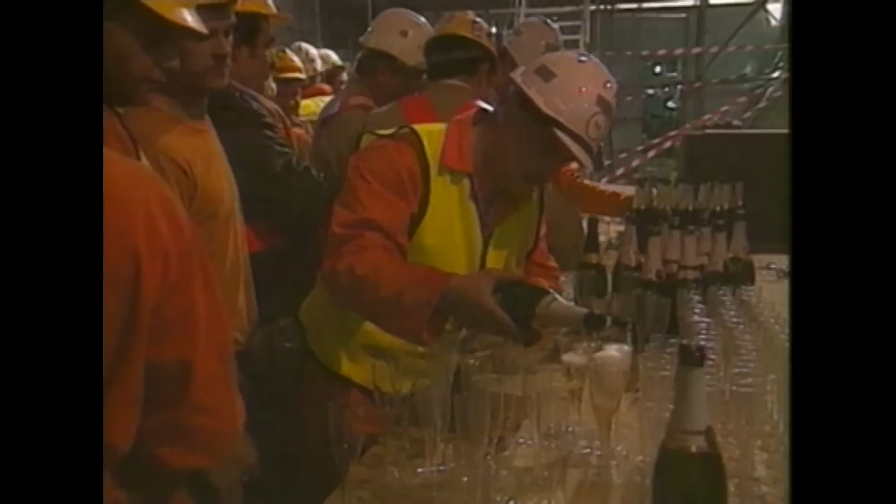4 years after the digging began, one of the most difficult engineering challenges in history is now complete. While workers celebrate and drink champagne, the machines finally fall silent. In the long, colorful history of these two countries, this is a singular moment. French or British, project chairman or supply cart driver, for a moment, it doesn't matter.

What is being created here and what has been achieved to date is of enormous value for the future of both our countries and of Europe. Thank you.

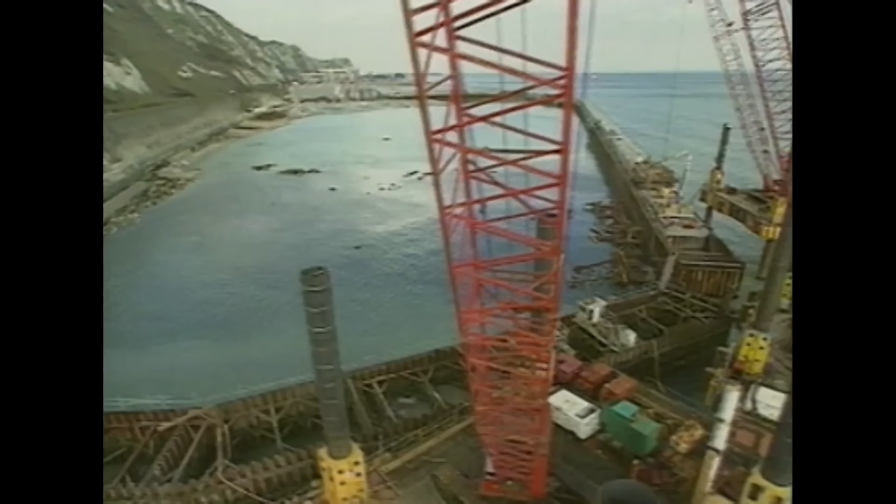In all, over 13,000 workers have labored for more than 6 years. Besides the 3 main undersea tunnels, each over 30 miles long, 9 other smaller access tunnels were also created. The amount of material removed on the British side increased Her Majesty's kingdom by 75 acres.

Engineers believe the hard part is over. In fact, contractors like Richard Robbins collect bonuses for finishing ahead of schedule. But when today's party is over, tomorrow morning will usher in the stark reality of a bloated budget and an uncertain future. To Eurotunnel officials, the hard part may have just begun.

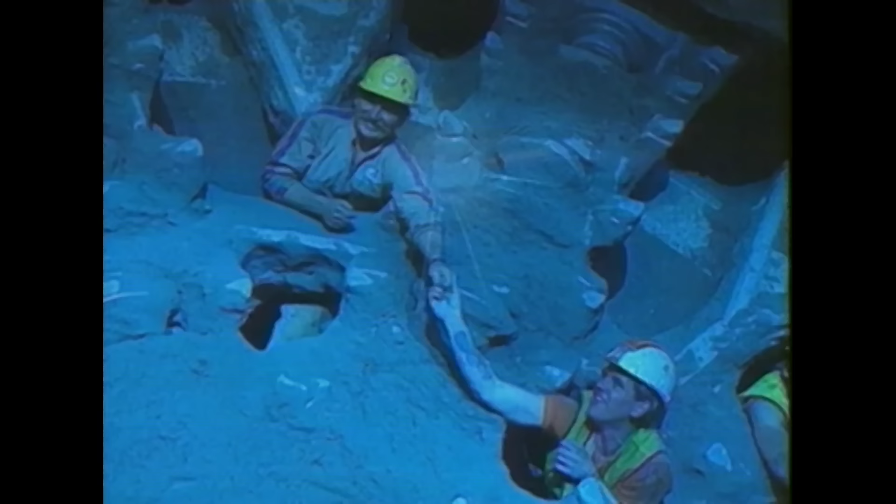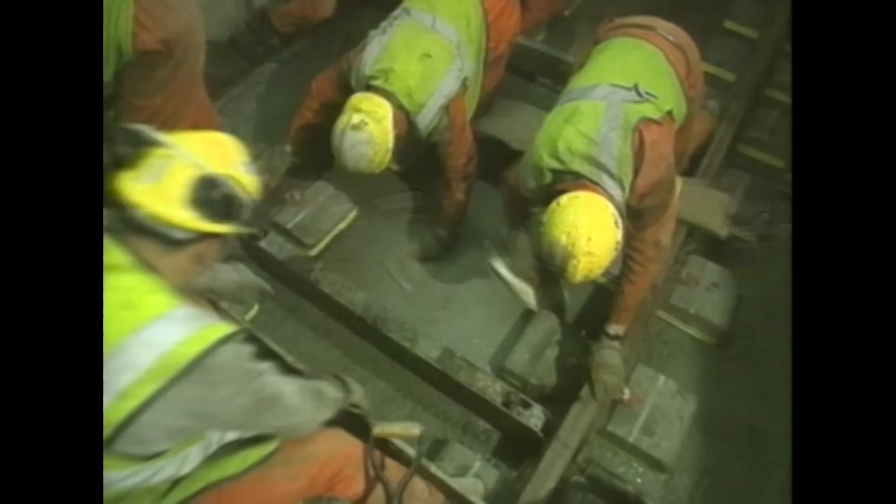With the digging of the Southern Railway Tunnel finished, the 7-year struggle to build the world's longest undersea tunnel nears completion. The narrow-gauge railway tracks which carried supplies into the tunnels are replaced by a new concrete floor. This will support the wider, standard-gauge railway tracks on which high-speed trains will travel at 100 miles per hour. Over 300,000 rubber shock absorbers are installed to secure 60 miles of track.

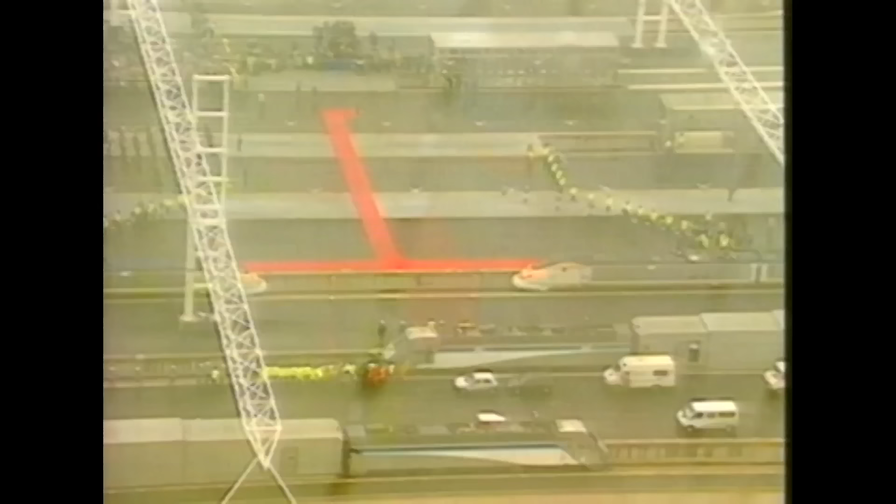The powerful locomotives that will pull trains half a mile long 20 times a day are delivered to the terminal at Calais, France. Finally, on May 6, 1994, the grand experiment is about to begin. After boarding one of the luxury Eurostar trains in London, Her Majesty Queen Elizabeth II arrives in Calais, France. This will be just the first part of an all-day celebration scheduled in both countries.

Her Majesty is received by French President François Mitterrand. After a ribbon-cutting ceremony, the Queen and the French President depart in Her Majesty's Rolls-Royce to travel on the shuttle back to England. The image is a powerful one. Not only are the former adversaries the Eurotunnel's ceremonial first passengers, they are also the public image of the new European, able to cross a once formidable barrier with grace and ease.

Arriving back in England for the second phase of the ceremony, Her Majesty takes time to greet each crew member honored with making this historic inaugural journey. But as the ceremonies and the media attention fade away, so does the public's interest. Initial usage of the tunnel is far below expectations. Critics of the Eurotunnel's costs, now almost $21 billion, are again on the warpath.

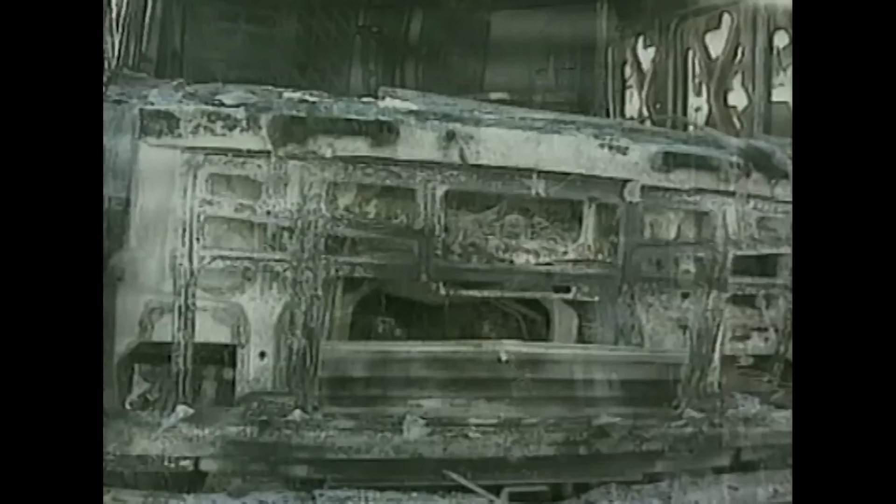The fire is so hot, it transforms the cargo of mammoth trucks into unrecognizable lumps of melted steel. 8 of the 34 crew members suffer smoke inhalation, and the tunnel is badly damaged. What has been called the safest tunnel in the world is now brought to its knees. Amid a firestorm of public controversy, the Eurotunnel is closed.

1,500 feet of railroad track and 150 feet of the tunnel's concrete lining are wrecked and need to be replaced. The damage caused by this accident, estimated at almost $100 million, makes it one of the costliest rail accidents in history. While no one was seriously injured, public confidence in the tunnel plummets. Eurotunnel officials go on the defensive.

12 hours later, nobody was in hospital. Yet there'd been a 1,500 degrees centigrade fire 300 feet away from them. Nobody was in hospital. Now say that about a highway crash, or about a ferry sinking, or about a plane crash. You can't. 17 days later, Eurotunnel officials stage an emergency evacuation exercise designed to reassure the public the tunnel is safe. A drill critics say has more to do with public relations than public safety.

Despite this disaster, the northern tunnel reopens to passenger traffic several weeks later. But the badly burned section of the southern rail tunnel is closed for 6 months while the damaged tracks are repaired. Finally, commercial freight traffic resumes on June 15th, almost 7 months after the accident. As this disaster fades from the headlines, memories of the accident slowly fade with it.

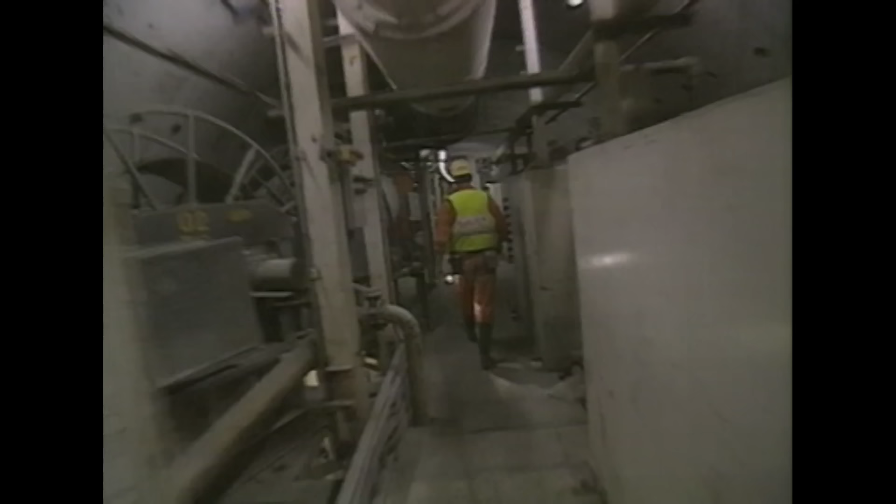The job of being a tunneler, of staring at a mountain or ocean and seeing a way to cross it, has always required a special type of person. A person who can exist without natural light, in suffocating holes, working for long periods of time towards a seemingly impossible goal.

Tunnelers are a special breed of people. They move around the world building holes in the ground. Most of their work is never seen by anybody else, but they do take a pride in building a good tunnel.

It remains to be seen whether or not the Eurotunnel will be a financial success. But officials say immediate financial return was not the sole concern of every investor. The philosophy of the investors was not, curiously, mostly financial. They said it doesn't matter whether we don't see any return. We think the benefits for our children, our grandchildren, are going to be extremely important.

The Folkestone Terminal in England and the Calais Terminal in France are now ports of call to thousands of travelers. This undersea journey, for centuries the subject of scorn and ridicule, now seems routine, the shortest distance between 2 points. If you were British and you lived here, we're an island, and if you want to get off this island, in the past, the only way is either to get on a boat or to fly.

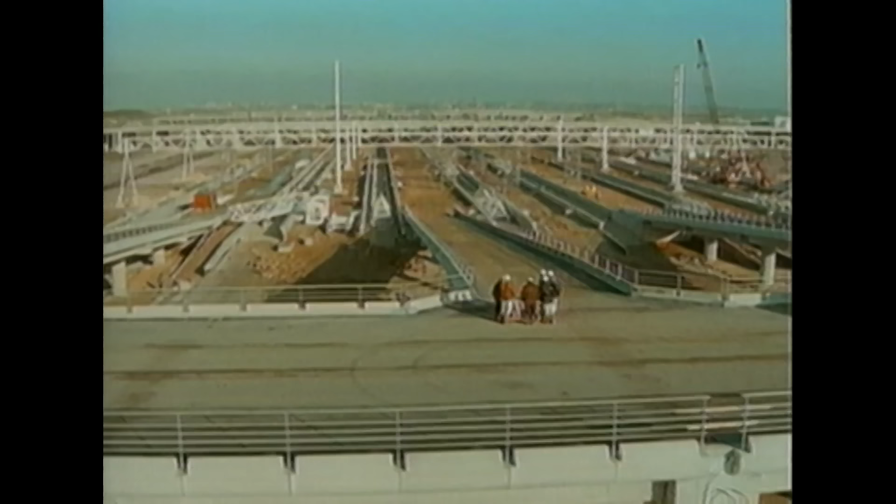The Eurotunnel remains one of the greatest engineering achievements of this century. For the thousands of men and women who built this tunnel, it stands as a monument to their belief that the impossible is simply a challenge, a temporary obstacle that can be overcome with technology, skill, and perseverance.

Having lived with it for the last 10, 12 years, I feel something special about it every time I come in. I'm quite amazed by the amount of work that went into the tunnel, the complexity of all the equipment, and the short time that it took to build this modern wonder of the world.

In the end, the Eurotunnel may be viewed as more of a bridge than a tunnel. As these high-tech trains speed beneath the ocean, crossing cultural barriers as they go, the free exchange of new ideas they carry with them will remain their most precious passenger.